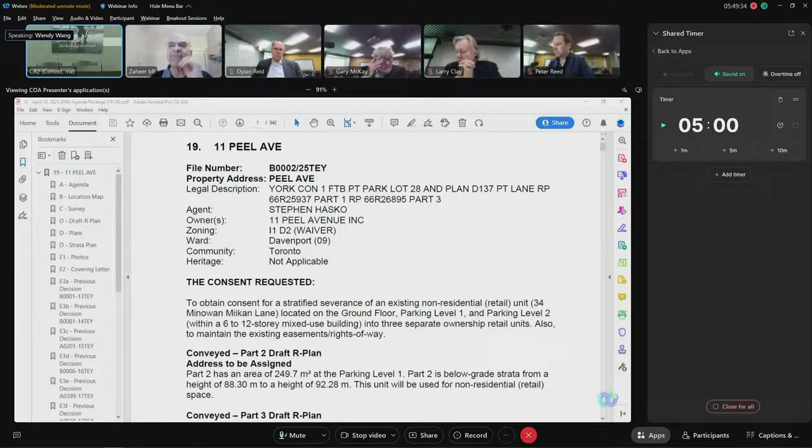Okay, ma'am, this looks like a fairly technical application. This is simply to sever and allow for 3 separate retail units within an existing multi-story building, right? Yes. Okay, panel, have we read this one?

Does anyone have any questions? Do you need a presentation? We'd like maybe just a quick, very brief overview of the application, just because it is technical and stratified. We want to make sure we understand it fully. Okay, go ahead, ma'am.

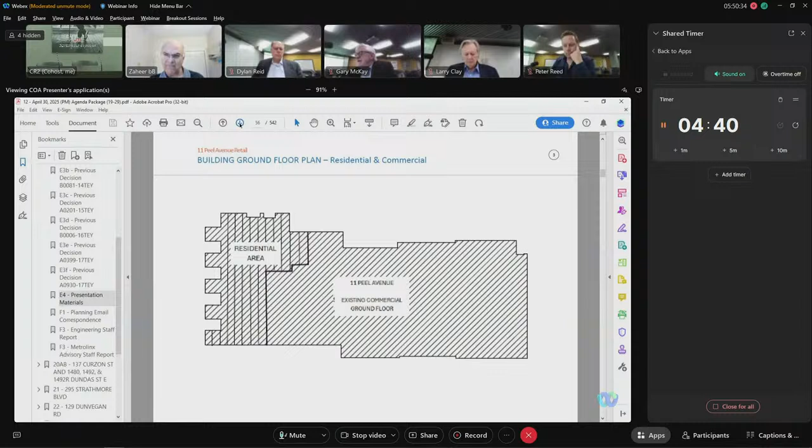Okay, so the retail component is comprising of the ground floor and the P1 level, which the Dufferin Street one is facing the above grade level, and that's the commercial level we are aiming for. On the residential side, there are townhouses, which is not relevant to this application. Can I go to the next slide?

So this is the P1, this is the ground floor. We would like to retain this as one piece, which is called Part 1 ground floor retained, and this is for the entire piece of the commercial unit of 11 Peel. If you can skip to the next one.

And then within the P1 level, as you can see, the top part is connecting to the underground parking lot, and the bottom part is facing Dufferin Street. We have the external exit to the park, and then connecting to Dufferin Street.

We would like to divide this level into 3 components. The P1 on the very left, which is connecting to the ground floor as Part 1, and Part 2, which is in the middle section, is connecting to the next ground P2 level, and we have one extra exit facing Dufferin Street. The last piece, in the color of blue, that's Part 3, will be a standalone severance unit by itself. If you can go down another slide, please.

And the last one is the entire P2 level, and that's considered as Part 3. The font is a little bit small so I'm not able to see, but it's connecting to the middle section of the P1 level that's above this floor. So that's basically what we are aiming for. If you can scroll down.

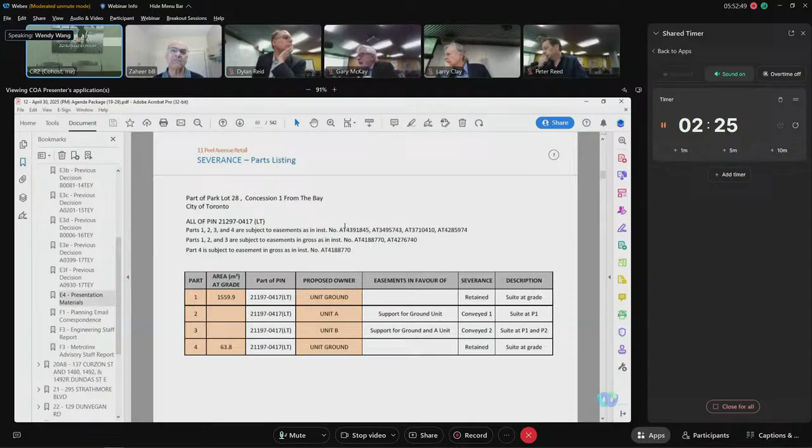So this is a list of the easements that it's currently connecting to, and also the part that we are going to sever. The only thing that we haven't touched is basically Part 4. This is because we have some open space going above the level, so we have something coming up listed as Part 4, and it's easier to be visualized under the R plan. The next one, I think that's basically it.

Any questions thus far? No. Dylan, do you have a question? Oh, Gary, did you? Well, go ahead.

I was just going to ask, why are we creating separate ownerships here with this stratified plan? What's happening? We are just trying to see if we are not able to sell the entire piece of the commercial unit, and if we can sell it in pieces, in 3 components. So we are trying to design it in a way that if we'd like to sell, say, Part 2, then they can take this as one piece, and then we can sell Part 3, and they can take the entire component as another piece. So we try to separate in advance for us to dispose of the property, basically.

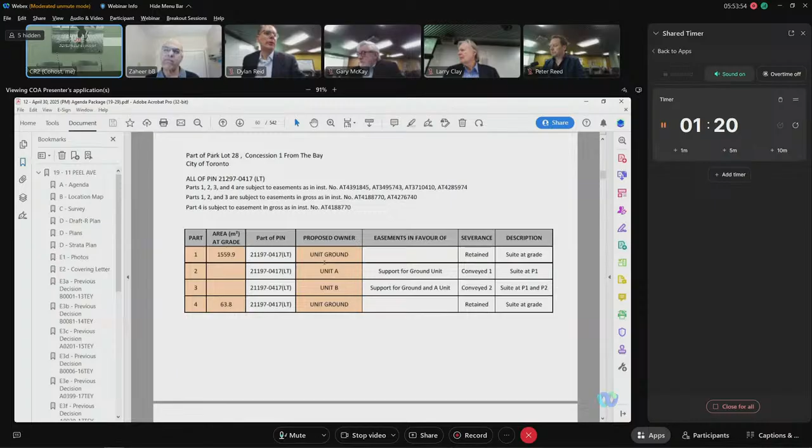Okay, thank you. Dylan? Okay, so I just want to make sure I understand exactly what's happening. So the P1 level actually opens out onto the park, right? Yes. Okay, so even though it's called P1, it actually has like a ground entrance. Exactly. If you can scroll up to the very first page with the photo showing. Yeah, I see, okay, I understand.

So what we're doing is we have Part 1, which is the ground floor and part of P1. Then we have Part 2, which is just on the P1 level. And we have Part 3, which has a little bit on the P1 level and then is mostly on the P2 level. Is that correct? Exactly. Okay, yes, I understand that correctly. Okay, thank you very much. So I just wanted to understand exactly what we were doing. Okay, yes. Anyone else?

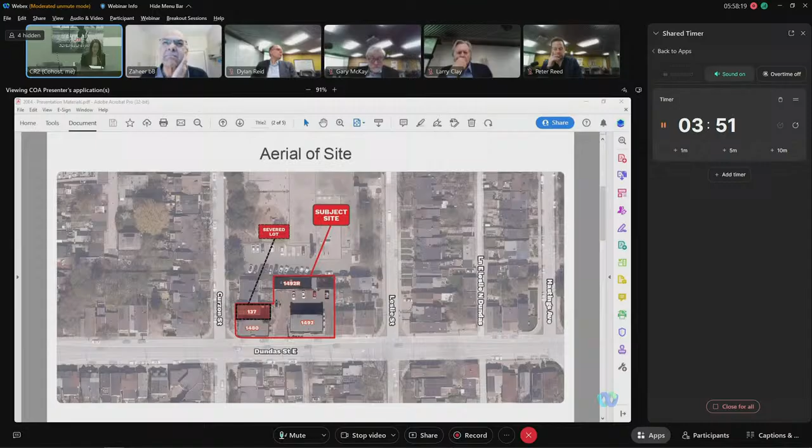This survey demonstrates that the lots were previously separate. The survey is from 1987. The lots merged on title when 137 Curzon Street was purchased, and the technical consent simply seeks to reestablish the previous lot lines. If we go to the next slide, this is our draft reference plan showing that 137 Curzon Street would be the severed lot.

And then if we go to the next slide, the reason for the minor variance application is that the property at 137 Curzon Street, as I mentioned, was previously subject to a minor variance application. At that time, the plan submitted in support of the application showed a lot area of 116.47 square meters, and the variances approved in support of the renovation permitted an increase in the FSI value to 1.57 based on that lot area.

And then the building permit plans included a different architectural set with a lot area of 111.47 square meters, which resulted in an FSI value of 1.64. So the reason we're here is because we have determined that the lot area is actually 111.47 square meters, resulting in the larger FSI value. So we're here seeking the technical severance to obtain this technical variance as well.

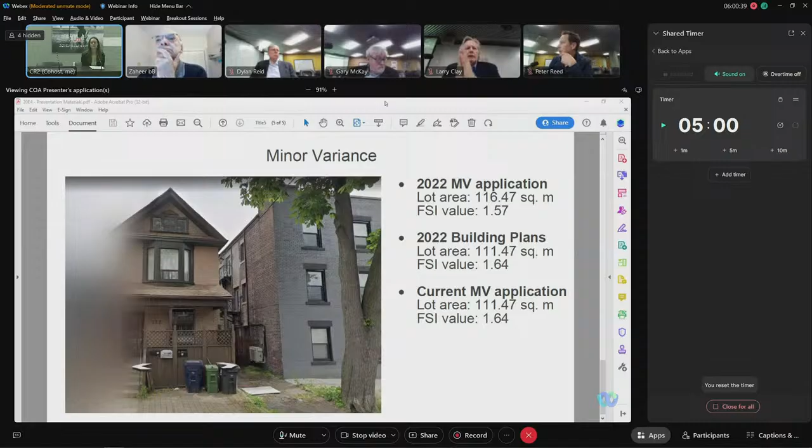Anyone else? Sure, okay, let's go into committee. Seems fairly straightforward. Peter? Thanks, Chair. That was a good presentation to understand what happened, but yes, I believe this is a technical variance just to separate two lots that merged on title. So I move approval subject to development engineering conditions.

Okay, motion by Mr. Reed to approve, subject to engineering, seconded by Mr. McKay. All in favor? Show your hands up. There we go. You have your approval, thank you.

A little slow on the mark there, Zaheer.

All right, we move on to item 21, which is 295 Strathmore Boulevard. This is an application to construct a new two-story ancillary building containing one parking space and one laneway suite with a second-story balcony in the rear yard abutting the laneway. There'll be a total of 2 residential dwelling units on this lot.

Committee has before it a copy of the minutes from the September 24th public hearing, a copy of plan of survey, site plan, floor plans and elevations, revised site plan, floor plans and elevations received March the 21st, and a covering letter from the agent. You have staff reports from Urban Forestry and TTC.

There is correspondence in concern from 1458 Danforth Avenue. Through you, Mr. Chair, we do have the agent online, no registered speakers for this item.

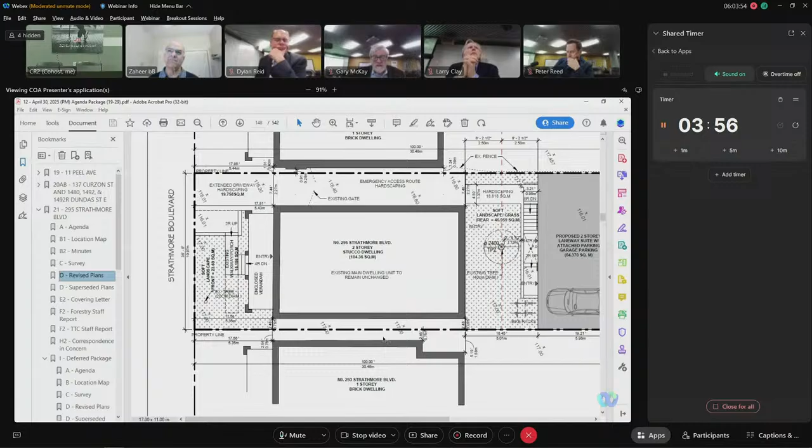Variances proposing right now, there are 3 variances we are discussing. Number 1 is the separation distance, which is also in relation with variance number 3, which is height. The required 7.5 meter versus proposed 5 meter.

Another one, the second one, is the building width, which is permitted 8 meters versus proposed 10.97 meters, which is the full width of the property, to accommodate design adjustments after reducing height.

And number 3 is the building height, which is permitted 4 meters versus proposed 4.3 meters, which is consistent with approved variances across the city and necessary to maintain livable interior space. This variance was also communicated with the planning staff back and forth, after the original requested 4.97, and after a request from staff to reduce it down to 4.3 meters.

So basically the proposed suite is modest in scale, respectful of the laneway and neighboring properties. The additional 0.3 meter in height is critical to allow for standard ceiling heights and livable spaces, but remains well within what has been previously approved in similar contexts.

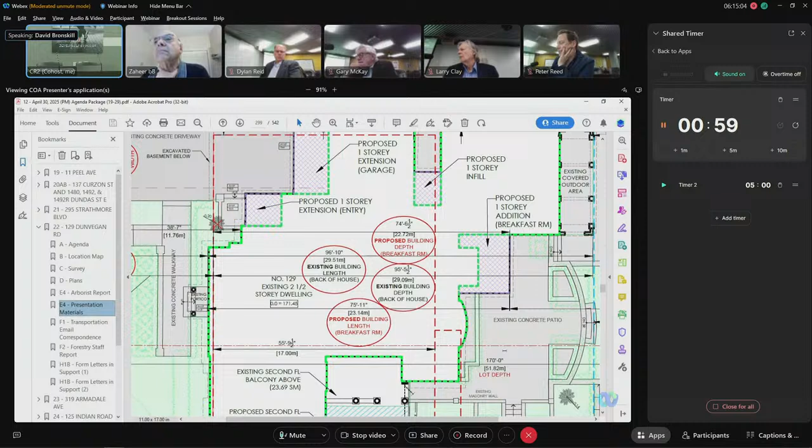You can then see on this map just the areas in purple where some additions are being added to the development. The one-story breakfast room is therefore counting to the length and depth that is being measured here. But as you perceive the house, Mr. Chair, I'd suggest all of these additions really are tucked in, frankly, in quite a subtle way behind existing portions of the building.

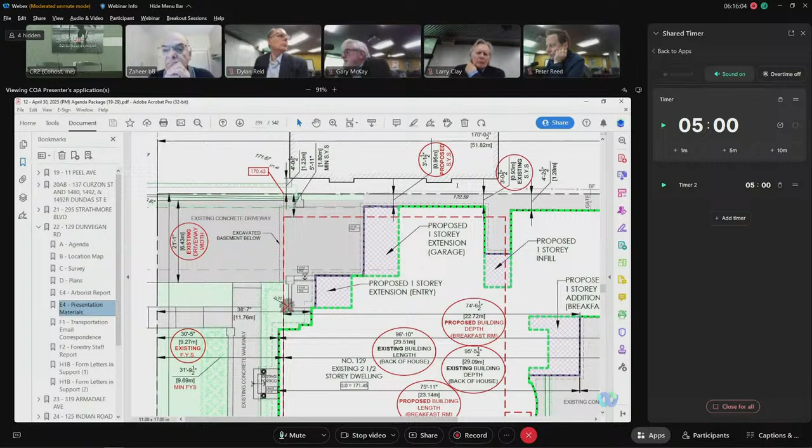Just while we're there with staff, you can see the existing driveway at the north, 6.43. The variance is recognizing that. There are no landscaping variances associated. And the north side yard setback, there's that little hatch, purple addition, to the left - it's a proposed one-story extension garage. You can then see the 0.95 side yard setback. That's the variance picked up. 0.93 is actually existing, but for what's being added, they're picking up the 0.95.

And then, Mr. Chair, I know I ran out of time, I'll just quickly do two things. Page 5 of the presentation just has the numbers. Obviously this area has lots of large houses with very significant FSIs, and we've circled in red anything that's above what we're seeking, and there's lots of them.

I'll just quickly touch on the balcony before commending the renderings at the back of the package to you. The balcony - if staff don't mind flipping to page 10 of the PDF - that's the one, that's great. You can see there's an existing balcony area there. There's a skylight being added in, and to get access around the skylight for maintenance, although it's not really usable space, the balcony is technically increased to 53.68 square meters. So all of that space counts.

It is larger than the bylaw, obviously. It is a significant space, but it's essentially a second level courtyard screened by the building itself, and because of the size of the lot and its depth, very far removed from the properties to the east on Forest Hill Road. So overall, I think just the function of the design, using the existing building, the size of the lot, and the subtle nature of the revisions, I'd commend to you the elevations and renderings. But otherwise, Mr. Chair, I think the variances all meet the four tests.

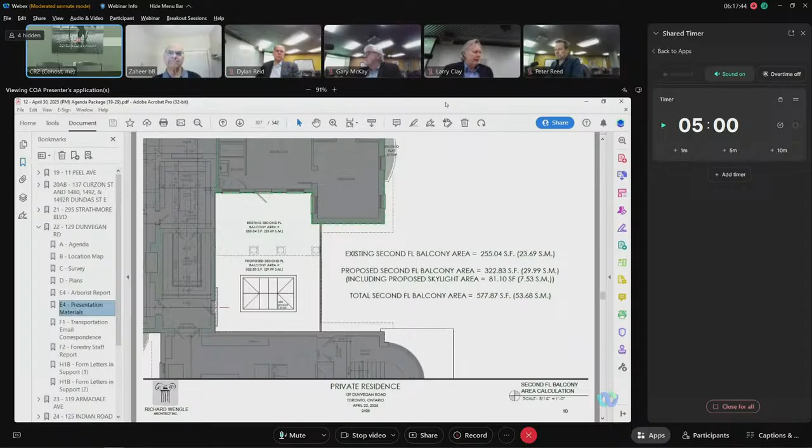I think you've answered everyone's question, so let's take this into committee. Anyone want to take this one on? Pretty large lot. I'm happy to.

Sure, Peter. There is a lot happening here, but it's a lot of very small stuff, I think, and most of the new massing is really masked or contained within the structure of the home. Some of the variances come out odd in terms of how they're measured, but really I don't see it as being a significant departure from what's existing there, particularly from the street. Thanks for the explanation about the balcony, that makes sense. So I think the variances are minor and their impact is minor.

So I would move approval subject to urban forestry 1 and 2. Motion by Mr. Reed to approve, subject to forestry, a seconder, Mr. McKay. All in favor? You have your approval, sir.

I would note that Dunvegan applications tend to get a lot of opposition from neighbors. In this case, neighbors were completely on side, which I think is a good thing, and not all that common on the street. Thank you, Mr. Chair. Thank you.

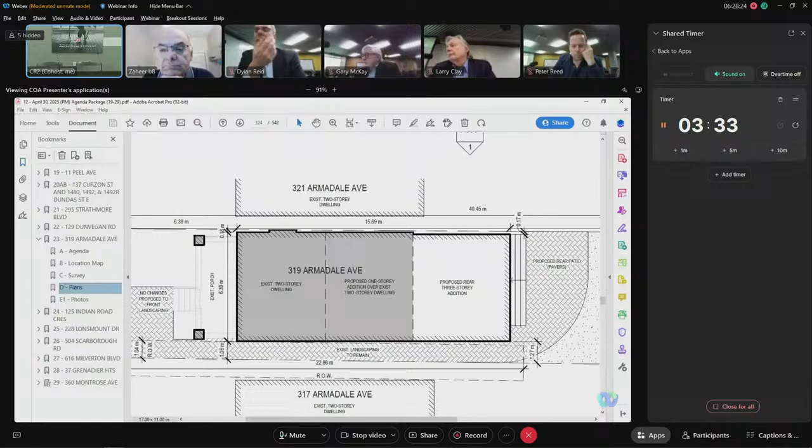It looks like it's offset in the back though, right? So they've come in a little from the lot line? Not enough to, yeah again, unusual. Anyway, I was just surprised by that because normally in these circumstances we would get that as one of the variances. I guess the other question is that the tree, probably it's not big enough to be bylaw protected, but I'm sure that it's a tree the neighbor uses and appreciates. Can you speak a little bit about any ways that you're going to make sure it's not damaged?

No, the tree will be removed as part of the addition. Okay, is it on your side or the other side? It's on the owner's property. You can see it just on the left of that photo there, that small cedar tree. Okay right, so that's on the owner's property. It's on the owner's property, yes. Okay, got it. Thank you very much.

Okay, any other questions? None? Okay, let's take this into committee.

Zaheer: Chair, with this one, thank you. We've basically got two variances, and I don't think either of them are excessive. The proposal is a very common type of proposal that we see very often in Toronto. There are no issues with this one. I don't believe there are any conditions attached either. So I'd like to move a motion to approve with no conditions.

Okay, motion by Mr. Byatt to approve, seconded by Mr. Reed. All in favor? Okay, you have your approval, sir. Thank you. Thank you, Mr. Chair. All right, we move on to item number 24.

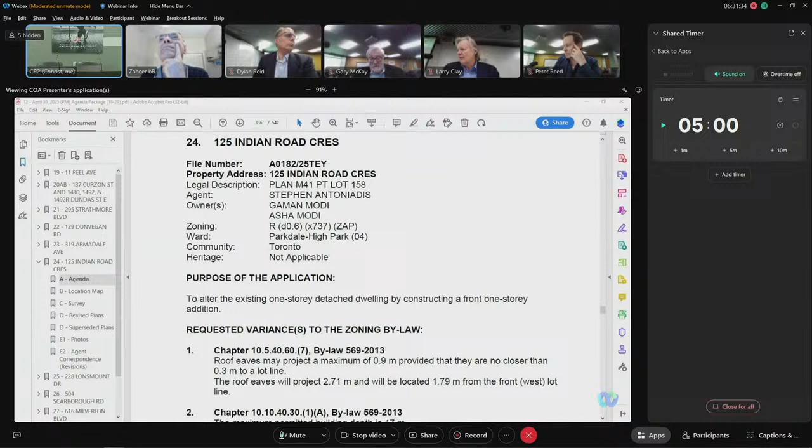What's the condition of the rear yard now? It's a driveway. Oh, because it's a corner lot. Okay.

All right, any other questions? Yes, Peter? I have some concerns with the front yard setback. With that addition in the front, it's going to change the streetscape, in terms of how it looks and feels. Can you speak to why that would be appropriate?

Looking now at Google Maps, the building length and building depth will increase, but it will give additional space that is important for my client. In terms of privacy, there is a tree. I don't see much changing except just a 2 meter increase in depth, and it will be built on an existing patio.

Are there other instances in this general area where there are front additions that go against the established trend? I'm not sure about that, but I was checking to see if there were any comments or concerns, so I'd get an opportunity to discuss them, but I did not receive any.

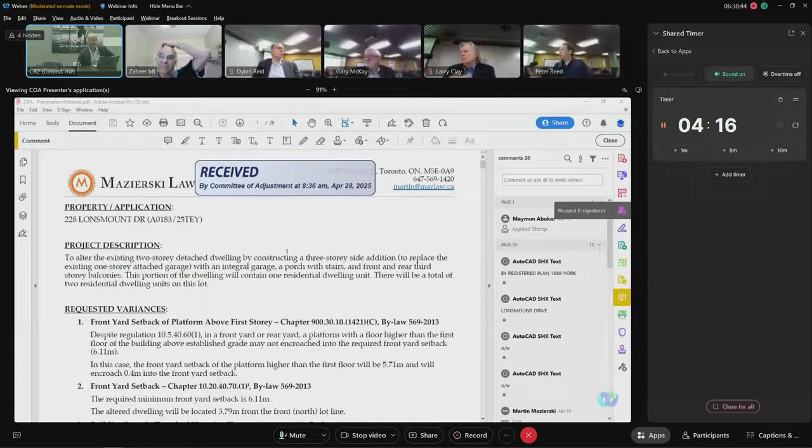I have Exhibit 1A, on page 7 of 28 of that presentation. I have a markup of the minor variances from the prior refused Committee of Adjustment decision. I know the neighbors have raised some of this in the prior variances, so that record is there. There's a record of all the variances that have been eliminated - that's 4 of them - and a detailed record of 3 variances that have been improved. So of all the 7 variances that were refused, 3 have been improved, 4 have been eliminated in the current proposal.

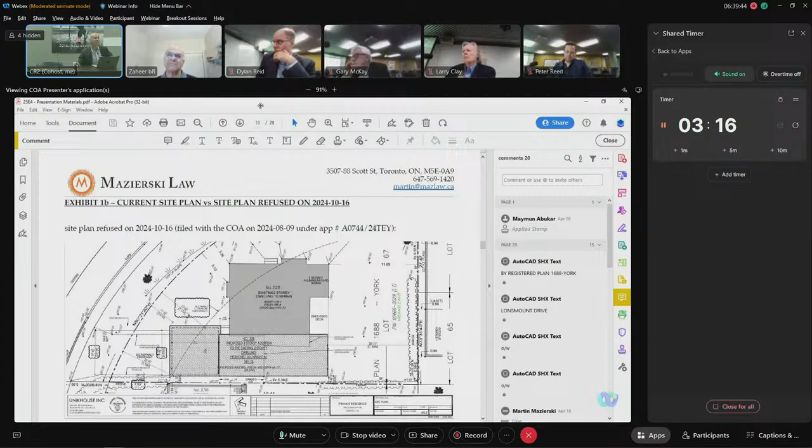If staff could please go to Exhibit 1B, that's on page 10 of 28. I have a site plan there - I've done comparison site plans. That's a comparison of the plans from the previously refused committee at the top, and the site plan from the currently proposed proposal that's in front of the committee today.

The bottom proposal explains how the addition has been shortened. There's a step back at the rear of the second story. There's an improvement to the front yard setback variance, which has improved from 3.51 to 3.79. The front yard setback of the third story porch has improved from 3.51 to 5.71. The length of the proposal has been reduced from 20.62 down to 19.88. Again, that markup shows the shortening of the addition, the step back at the rear of the second story and third story, and a step back at the front.

Now, if we could just go to - I wanted to proceed now, Chair, to the specific variances. I have one more exhibit, Exhibit 1C, on page 11 of 28. This is a copy of a drawing of the previously refused side elevation from the west side versus the currently proposed side elevation. That exhibit will explain to the tribunal that previously the proposal had a 20.37 meter length across that distance. Currently, that length has been reduced to 17.77 meters at the second story.

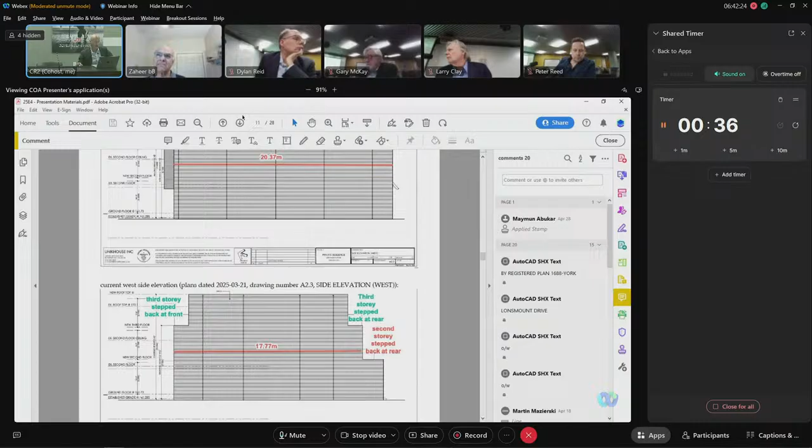the length looks like from the lot to the west, which is the nearest really adjacent property, Chair. So to the next slide, I wanted to go to the front yard setback specifically. If we could still please go to page 12 of 28 of that presentation, and zoom in a little bit on that one.

That little pink shaded area represents the front yard setback variance associated with the third story porch. That's the only part of the variance. I'm going to come back to this slide for the blue area, but that pink area is the only part that's actually non-compliant of the bylaw. It's a little pinch point.

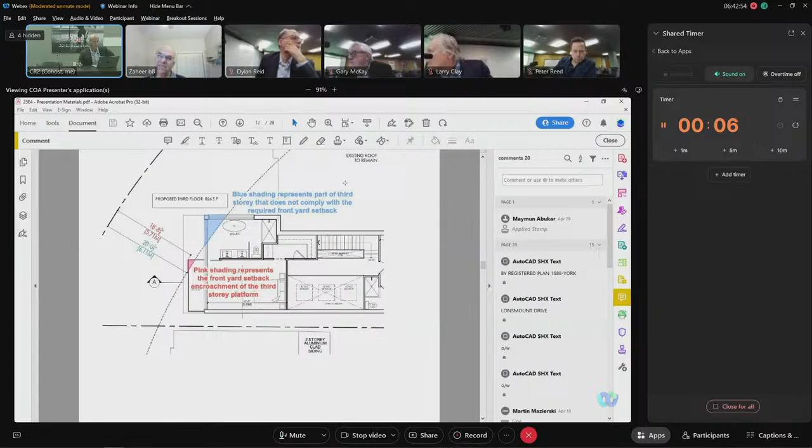So if we could jump to the next exhibit, the very next page. I'll just ask you, you're well past your time. I've given you a little bit more, but if you could summarize for us. I'll be very quick then.

It shows that for anybody walking down that street. If I could jump, because we're summarizing, to the exhibits on page 17 and 18. I think page 17 is best.

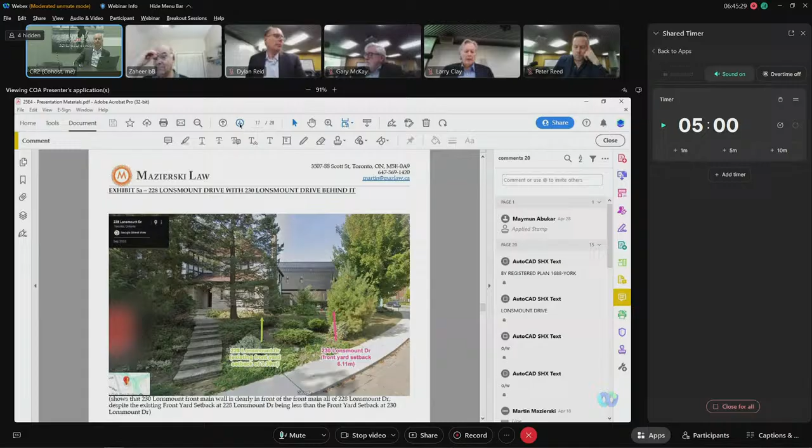Just page 12. Yes. So you have the pink and the blue, but that's on the third level, but there's a level below that that's also sticking out, right? Yes, I have an exhibit that explains those setbacks at that story completely.

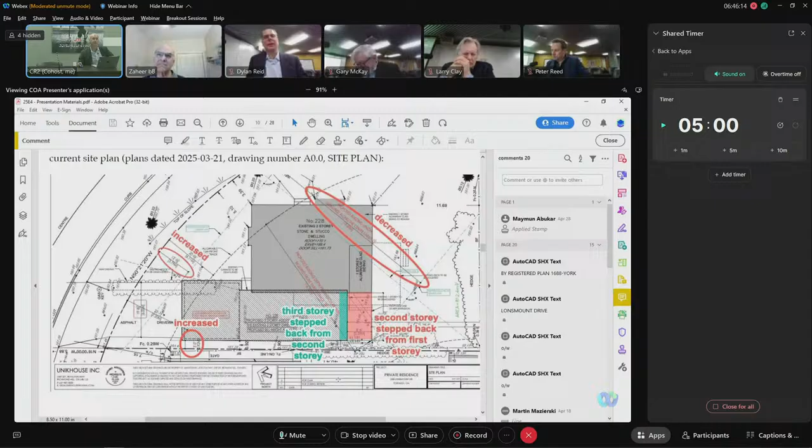But those are further into the front yard setback. Yes, I just wanted to clarify that. On page 10, I think page 10 is a good one. On the bottom is the marked up site plan of the current proposal versus the existing. It shows the existing 3.79 meter setback at the front, and it shows the 3.39 meter setback of the existing building on top of that. Okay, thank you, I just wanted to clarify that.

And my, so the addition height is 10 meters, right? Yeah, but there's no variance, Chair. No, that's what I was just going to say, there's no variance, so you're complying with the bylaw. Was the previous application similarly? There were height variances, there's little tweaks. Right now there's rules in the bylaw about how much of the wall has to comply, and it has been reworked and discussed with the examiner. So the wall heights now comply, Chair.

Okay. All right, maybe we can go to our speakers.

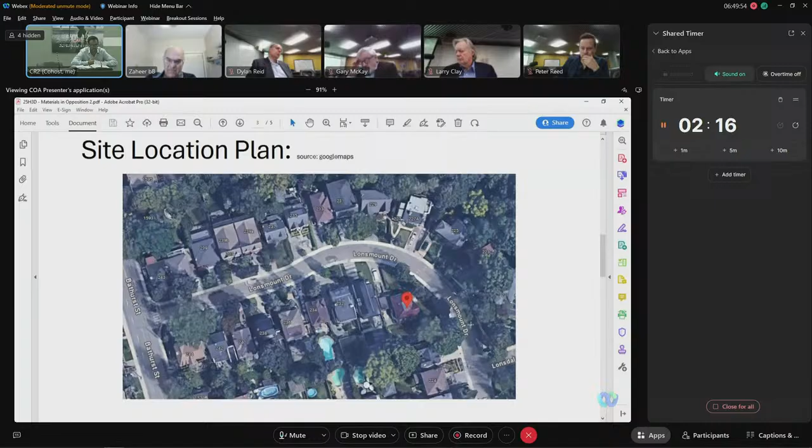So the next slide shows just an overlay. You can see how all the houses, whether the street is going straight or bending a bit or otherwise, the front yard setback is really a character-defining element of this part of the city. It's not just one house or what's beside the next house - the whole street has observed, and I think is thriving off, the street character of the front yard setback, whether it's at a curved part or a straight part.

So none of us made this curve, but this is what's here, and we just observe that that's an important situation.

If the next slide here, we zoom in - if I could just trouble you to zoom in just a little bit on the scale, thank you. You can see approximately, this is the site plan as it currently is, and you can see that part of the house does encroach. It's a nice brick piece that does encroach, so to speak. It's relatively low, etc. And you can see where the red kind of curves, so it's curving in parallel.

The blue portion is still the buildable area of this site. This is a site that has a front yard and 2 side yards that converge, so that hashed area represents an area that is buildable. So the rationale that was presented, that it's a difficult site - difficult maybe in the eye of the beholder - there is a lot of buildable area.

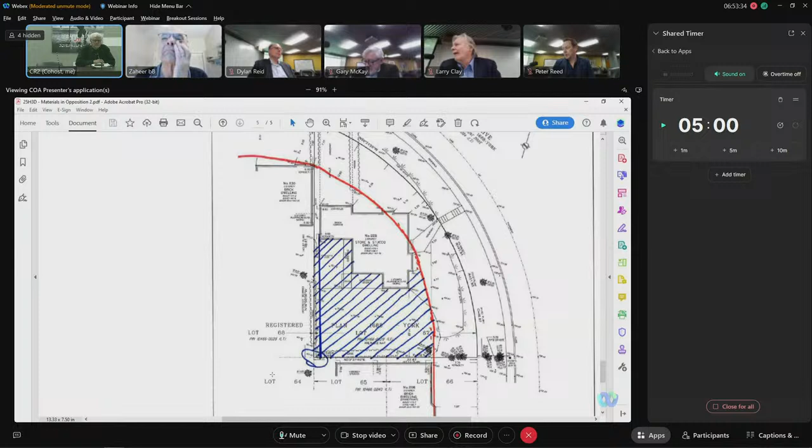Okay sir, you have 5 minutes. Okay, I prepared a presentation for the young man to bring up. In essence, it's like Takashi's. Takashi and I and the rest of the neighbors think this is just more of the same.

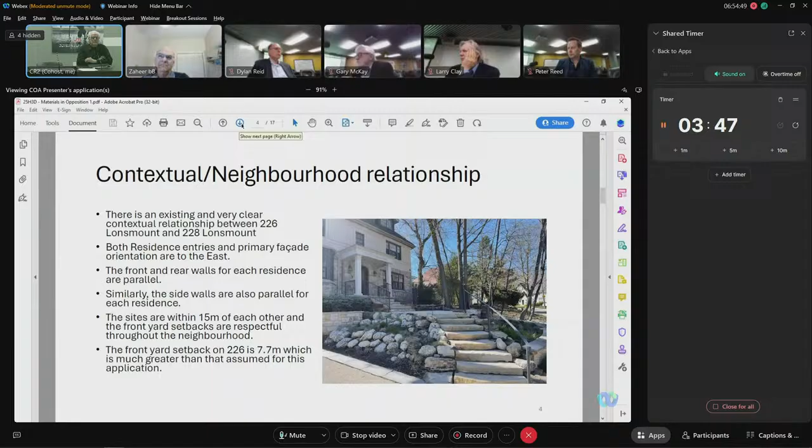This is the contextual view of 226 versus -- you can see 228 in the background. 226 and 228 both face east, they front on Lonsmount Drive. And I disagree with the examiner's idea that the setback to 226 wasn't relevant. It would seem that it does, that it is relevant, even though it's more substantial, 7.7 meters.

So next slide, you can read all the other stuff. So this was basically -- I put this together just saying it's not in the spirit and intent of the zoning and development bylaw, in our opinion. It's not minor. And then the next.

This is the front view. So they did set it back a little bit at the third floor, but this red bulk is the encroachment. You can see it on drawing A0.0, that the line, the arbitrary line of the setback, is 6.1, and the encroachment reduces the setback to 3.79, as the counsel mentioned. That means it projects 2.32 meters into the required front yard setback. By the way, that's nearly 8 feet.

If you go back to the last slide -- I'm sorry, really quick -- you'll read that I've noted it's a 37.9% reduction, as in the encroachment.

So let's keep going and you guys can read all this a little later. That's the yellow line, or the orangey line -- that's the encroachment of the old house from whenever it was built, in the 40s or 50s. So that encroached a little bit, but it's not as significant.

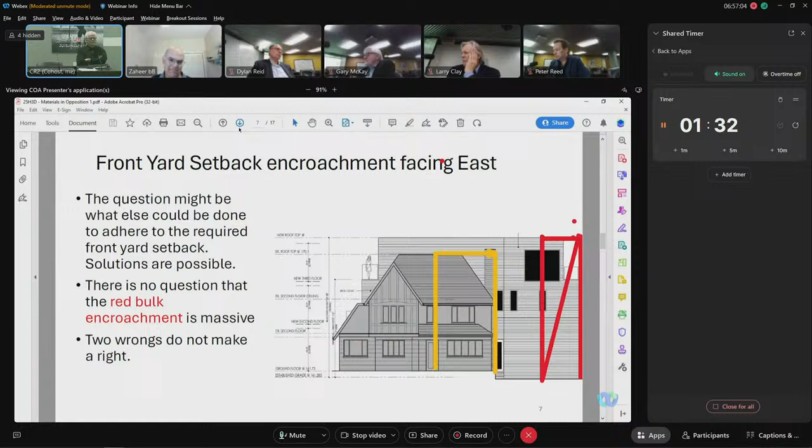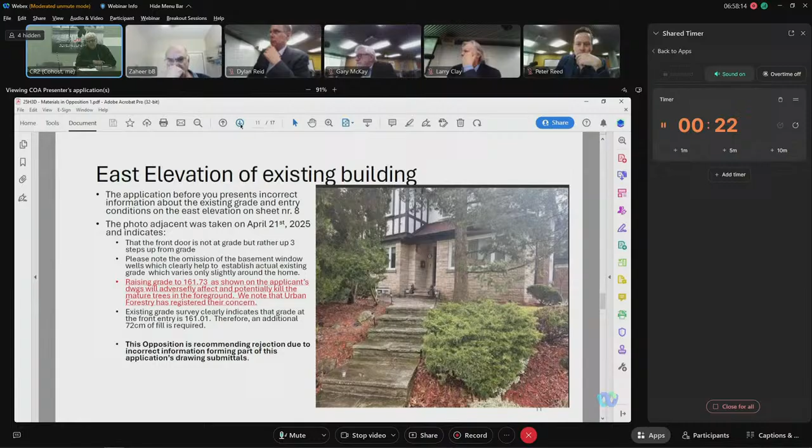This is the elevation of the existing building, and what I want to point out here: grade is an amazing term. You can see the grade is not at the front door. It grows - there's 3 steps up plus the threshold.

Same thing here. The omission of the window wells has created an artificial-looking surface, and you'll see it in the establishment of grade. Now, I'm not challenging the established grade calculation. I'm concerned that you're looking at a drawing that has erroneous information on it.

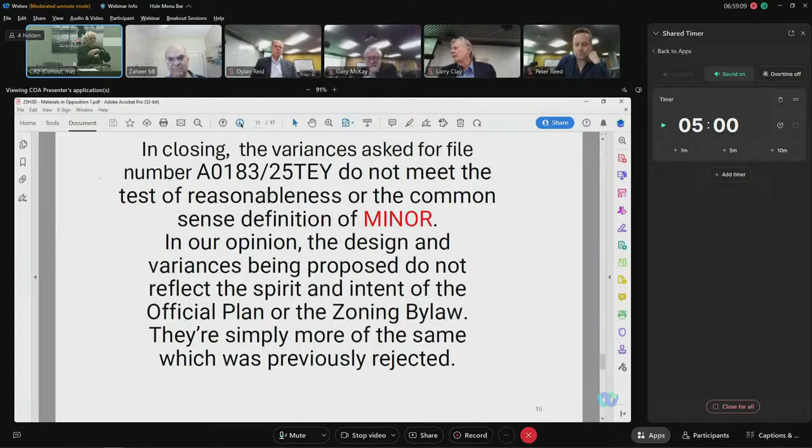Last slide, I think. So that was - it's not minor. And then there's what I like, this quote: 'Right's right if no one's doing it, wrong is wrong if everyone's doing it.' It applies to all of us.

All right, sir, thank you. Thank you for that flourish. Any questions of this speaker? Okay, thank you very much. We get the agent back.

Okay, sir, you have 5 minutes to respond. Thank you, Chair, I will try to be brief and just focus on some of the points raised by the neighbors. Chair, with respect to the first presenter, I believe the presenter was an architect and developer, mentioned that he put forward a proposal without minor variances because he had worked with planning. I wanted to remind the tribunal, if it wasn't noted on the record, that this proposal has not raised any concerns from the city planning department.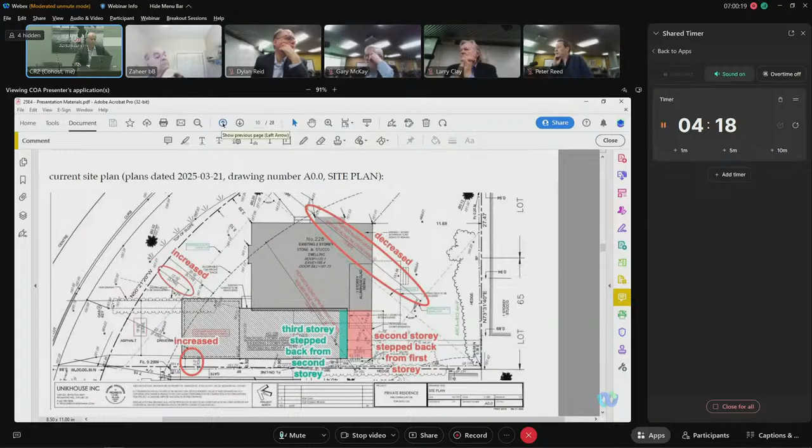With respect to some of the other comments, again, on the whole idea of the front yard setback, I think staff, if you could please go to Exhibit 3A, that's the one on page 13. I think that's a very critical exhibit. The one on the page that follows simply explains where that pink line is coming from. The pink line is the front wall of the building adjacent at 230 Lonsmount.

I'm going to address some of the concerns from both sides mentioned here - they're concerned about the transition from the property to the south. When the examiner determined the required front yard setback for this property, they simply looked at that building along the red line. That building has a front yard setback based on the regular lot of 6.11 meters. That's the required front yard setback because the examiner looked at this building and saw that the other building was so far away, and given the location of this addition, when determining the required front yard setback, they did not average the properties at 226 and 230.

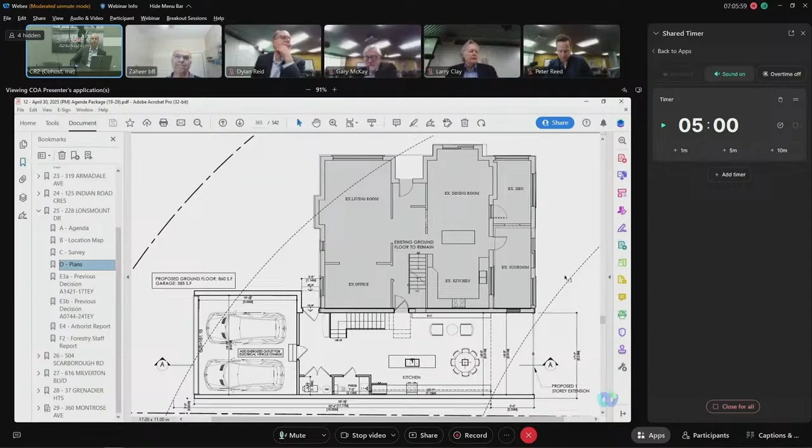Okay, thank you. Any other questions? Okay, seeing none, let's take it into committee. Three of you were on this application when it was before us last time, so I'm going to ask you guys now what you think. Who wants to go first? Peter? Sure, I can start.

I think it's a lot better now than it was last time. Last time, as Dylan said, there were questions. It was just hard to figure out what was happening, what the intent of the proposal was. I think there have been significant improvements around the massing, stepping at the front and back.

But from my perspective, the main issue that was there for me last time still remains: the front yard setback. I understand that given the complexities of this curve and the corner lot, calculating that number is not clear, but I find that it sticks out too far. Even though you've got this very large structure to the right of this property, I think that it comes out too much, and I think that has a negative impact on the streetscape.

We said last time this was heard that there's a lot of flexibility on this lot, like there's a lot of room where additions can go without having to push into that front yard setback. It's not for me to determine why this is being put forward, but I think there are other options to more sensitively develop on this site that wouldn't detract from that front setback. I do think it's great adding an additional unit in neighborhoods like this. It doesn't happen that often, so I find that a very positive thing. But in its current form, because of the front yard setback, I can't support it.

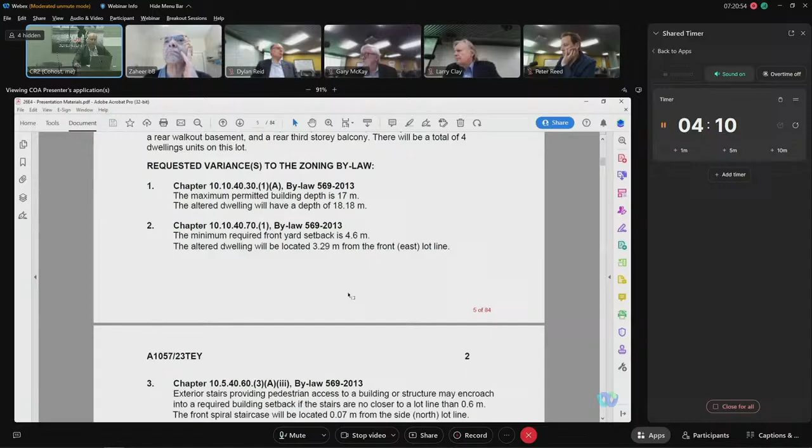So after that Committee of Adjustment approval, Chair, a building permit was issued. The building permit is in Exhibit 2 of the presentation, starting on page 13 of 84. If any panel members wanted to look at it, all the drawings are there.

During the construction process, it was discovered that the pre-existing northern wall had been compromised, and that the pre-existing northern wall at the basement and first story level would have to be supported during and after construction. A signed and stamped engineering report explaining the structural issues in more detail is attached as Exhibit 3, starting on page 27, if anybody wanted to look at that in more detail.

I wanted to quickly go to page 36 of 84 of the presentation. If we could zoom in on that northern wall, this is at the basement level. So what happened is, staff, could we zoom in a little bit, please? Yeah, if anybody can see that existing wall at the basement level, zoom out a little bit. I just wanted to look at the north side where that red line is drawn.

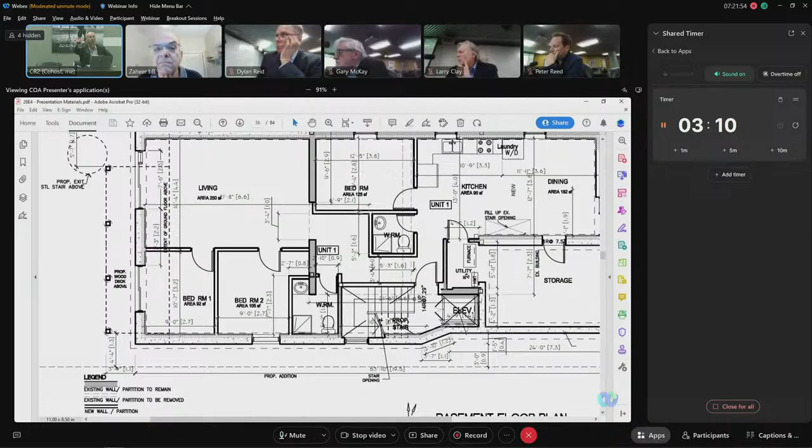Yes, perfect. So that existing wall at the basement and actually at the first story level will remain in place as is. That is actually the basis of the legal non-conforming side setback on that north side. What happened during construction, as explained in the engineering report, there were structural issues with that wall, again at the basement and first story level. Therefore, a concrete structure was built around it on the perimeter, on the outside, to solidify the structure and avoid a dangerous engineering situation. If you see that wall, that building wasn't pushed.

That red line represents the difference between the building permit and the current proposal, and it also represents the entirety of the minor variance. That 20 centimeters is the support structure to maintain the basement and first story wall. If we go to the page, you'll see that structure extended all the way to the back, that thick wall to maintain that compromised wall at the front. There's a 20-foot concrete footing all in all, trying to maintain the structure and keep it up all the way to the roof.

If you go to the second page, you'll see the page that follows, please. This is page 38 of 84. One page down, same thing. This basically shows on the first story, the same thing has happened, that concrete structure was extended upwards, and that red line, that red area, represents the only difference between the building permit and the proposal. There's a massing on that floor, and it represents the only part of the minor variance.

Again, that supporting structure, for structural reasons, the 20-foot concrete footings have created the 20 centimeters in extra width, and maintain steel beams that now go up all the way to the roof to maintain the basement walls and the first-story walls all the way to the roof. So the entire variance for the whole proposal is tied to these 20-foot footings and steel beams extended upwards to put the building up against the wall.

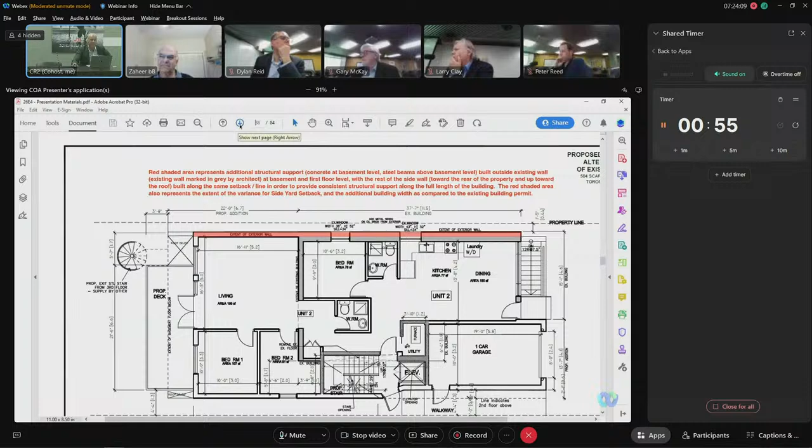I have photos, a lot of photos starting in Exhibit 5, on page 47 of 84, showing many very similar side yard setbacks. These photos illustrate that many of these properties have non-compliant setbacks. Some of these setbacks may have been approved by variances. Many will be legal non-conforming setbacks of the original buildings that predated the standard in the bylaw, and the legal non-conforming setbacks involving additions to original buildings that predated the standard in the bylaw.

So again, there might be additions to the original non-conforming structure. The photos show an aggregate side yard setback less than 3 feet between these buildings, which is less than 0.9 meters. Even though, as per the photos, the side walls have windows, which would, absent a legal non-conforming wall or minor variance, require side yard setbacks of 0.9 meters - meaning that those setbacks between walls with windows, in theory, would need to be 1.8 meters if they had windows.

If they didn't have windows, there should be 0.45. And there are many examples there that look like they're less than 0.45 because the aggregate setback is less than 0.9, despite the windows.

Again, there's a comprehensive photo set there, Chair, explaining the character of the neighborhood. Just to summarize, the intent and purpose of the official plan is to manage the character of the neighborhood. The zoning bylaw implements that intent and official plan. The setbacks are consistent with the neighborhood.

I'm going to address the impact later in my response to the neighbors. Last comment, Chair, is this is four units. So when we're talking about special considerations, there will be 16 bedrooms in this fourplex. In this revised proposal as it stands in front of the committee today, there'll be a total of 16 bedrooms supported in this fourplex when it's completed. All right, thank you, sir.

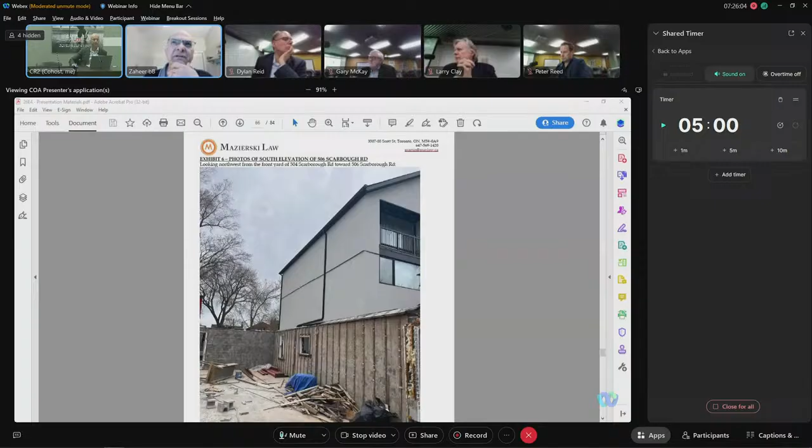Yes, here. Just a quick one. Thank you for the explanation about the side yard issue and the concrete wall. I was just looking at your drawings and the west elevation. You've got a rooftop deck? I don't believe there's a rooftop deck on the plans.

One second. Am I looking at the wrong application? Oh, you know what, I think I'm looking at Parkside Drive. Oh, no. No, you're right, you've got a spiral staircase going up.

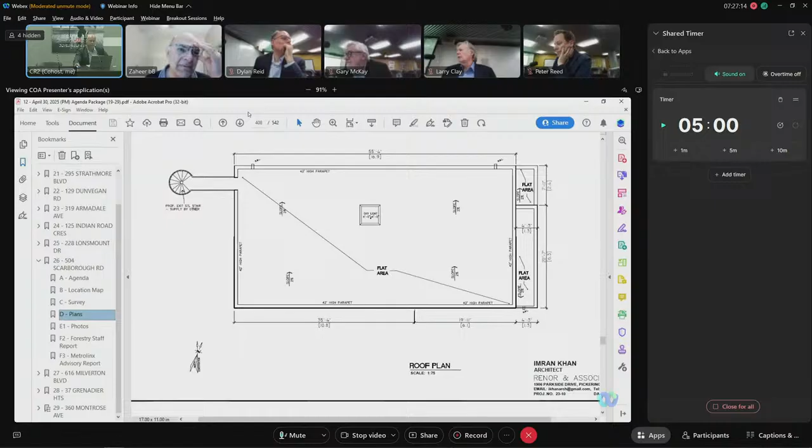Chair, if I may comment, if you look at the west elevation, it's quite clear that there is a spiral staircase going up to the roof. Sure, I do recall that that's on updated plans. I acknowledge I had this discussion earlier with my client, and my understanding was they weren't going to introduce one. I think this was one of the recent revisions where I didn't catch it in earlier plans.

I just wanted to go on the record because I've had this discussion with my client. If the panel felt like this rooftop deck was at all a problem, I'm happy that the panel adjust the decision and eliminate that rooftop deck. That was, again, discussed with my client. There was discussions going back with the architect. I'd advised them not to add a rooftop deck.

I think something might have been lost in translation when the plans were most recently updated to show an additional detail that came with my cover letter, and I missed that update to those plans there. I'd spoken with my client, I discouraged them, I didn't think it should be part of this proposal. If it's an issue to the committee—

Well, it's an issue in the sense that it wasn't part of the application that received approval previously. And rooftop decks have a way of getting neighbors' attention. It is something that often neighbors are concerned about: noise, visual overlook, and everything. So it wasn't part of the first application that was approved. You and your client might be well advised to remove that now.

Chair, like I said, I'm happy to remove that. It was my advice to my client. I didn't realize, again, I think it might have been lost in translation in discussion with the architect. I'm happy to remove that. I'm not requesting a rooftop deck today. All right, good catch, Zaheer.

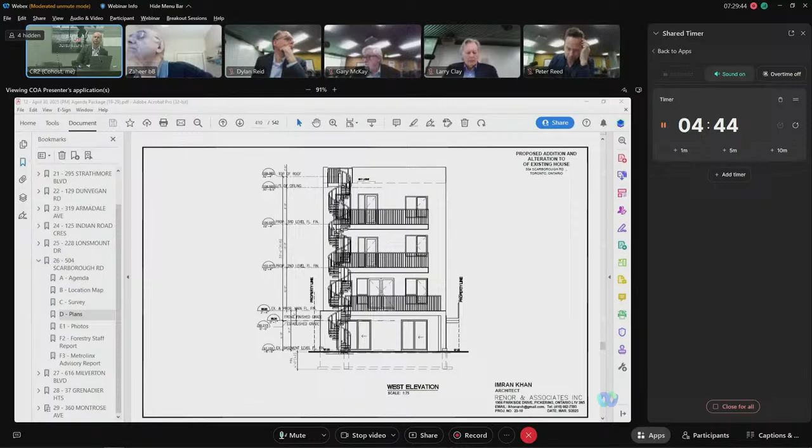Okay, perfect. I have submitted a letter expressing my strong opposition to this application. Can I have the presenter pull up my letter? There are 4 reasons and a few pictures that I want to walk you through what we are dealing with. But to start, I just want to say that I'm actually pro-housing. I have myself developed a 4-plex on my side, so I know what this owner is trying to do.

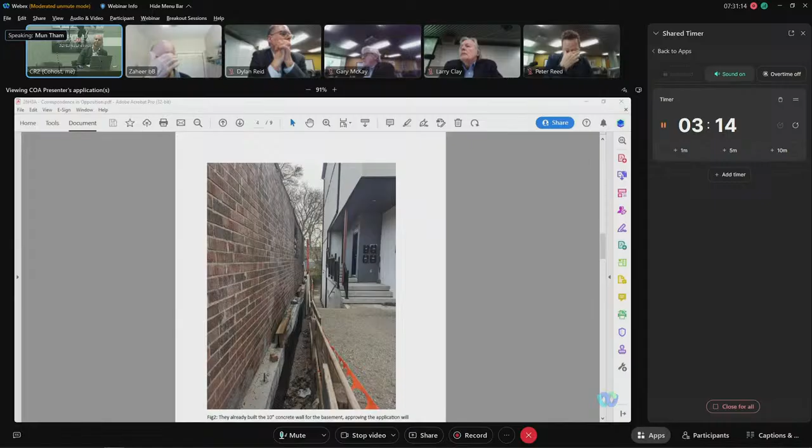If you can scroll down to the next picture, as you can see from the back, it's a very narrow alleyway. Our two houses are going to be four stories, a giant monster four-plex with a narrow alleyway about 25 feet long. During wintertime there'll be no sunlight. It's going to be bad for snow removal. That's why this setback is not acceptable, it's going to make the space really crowded.

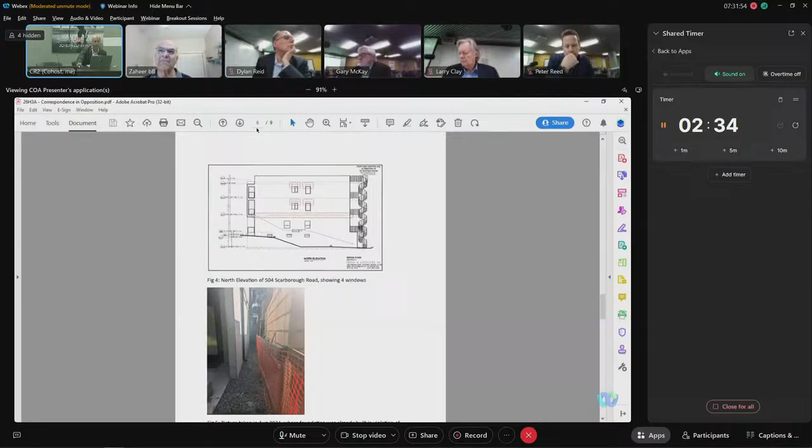Next reason, if you can scroll down, this applicant also showed a successive kind of manipulation of the zoning process. If you look at our bylaws, the required setback for a four-plex, clause 3A, should be 0.9 meters for any walls with windows. But right now they are asking for a 0.44 meter setback with windows. How they're able to do this is because rather than pursuing a new build, they have gone the route to alter the existing single-story dwelling. They were able to retain the legal non-conforming setback of 0.64. And now, in August, they built this foundation wall that's only 0.44 meters. So successively they are able to reduce the setback. I feel that this is a pre-planned encroachment on their end, and it compromises the integrity of our planning process.

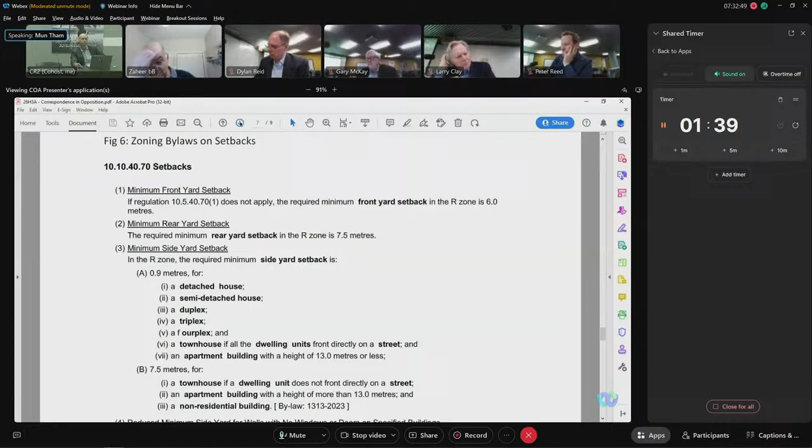If you can scroll down to the last picture. The last reason is this applicant has also shown ongoing disregard for bylaws and neighbor safety. You can see from figure 7 and figure 8, during construction, because they had to excavate really deep, 15 to 20 feet, they have severely damaged my property. This is the back walkway. At one point it was all gone, exposing my foundation for over two months last summer. I escalated to Toronto Building. They issued two notices of compliance, but the applicant ignored that as well. They have also built their construction fence on my property for all of summer. They did not get my approval and refused to remove it. The careless conduct extended to other neighbors, who is the other speaker, and also to city infrastructure.

If you look at the walkway in front of their house, it's completely damaged. To conclude everything, I have to do the repairs to fix my driveway, my stairs, and my walkway. They still haven't reimbursed me. So I don't understand why we even want to contemplate this application. Having built a fourplex myself, I understand the economics, I understand what they're doing. They didn't have to be this greedy, they didn't have to go this far to cut corners. I respectfully ask the committee to reject the application.

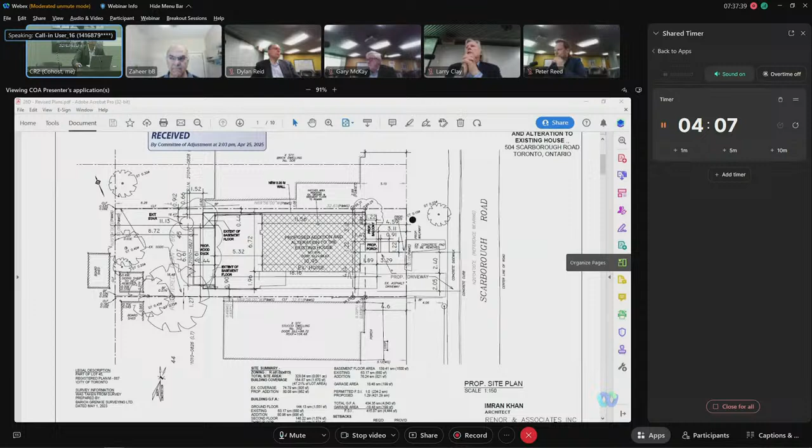All right, sir, you've heard some concerns, particularly around construction and other matters. I wonder if you could take no more than 5 minutes to respond. Thank you, Chair, I'll be very quick.

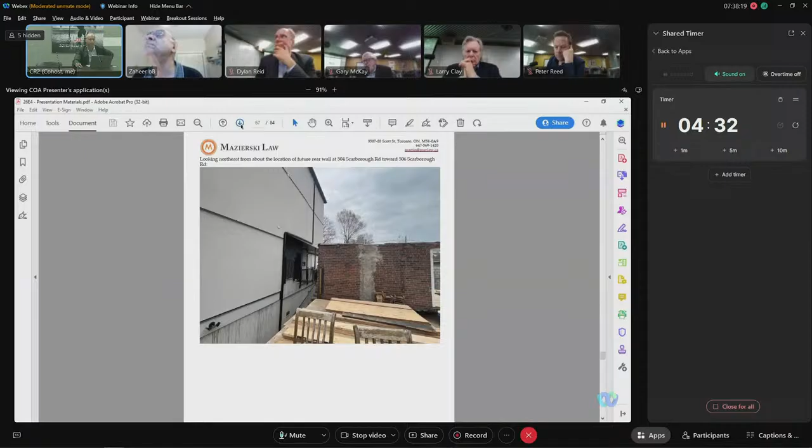To address the concerns raised by the first neighbor about 506, there was a privacy concern. I was hoping, if my presentation's up there, you could please go to the photos in Exhibit 6, pages 66 to 70, attached to my presentation. It's photos of the south elevation at 506 Scarborough Road. What those photos demonstrate, Chair and panel, is that there are no windows on that property at 506 Scarborough Road.

With the exception of one window—if you freeze at that photo, you can see through the window on the right. That's the window behind the kitchen, the existing location of the kitchen window at 504 Scarborough Road, and it has a window at 506 Scarborough Road on the other side. That's the only window at 506 Scarborough Road facing in this direction. That's the one complained about by the neighbor regarding privacy issues.

To reiterate, the addition on this building is not shifting that wall anywhere closer than what's in the building permit on the legal non-conforming wall. It is simply making the wall thicker. Therefore, the kitchen on the inside of that wall will not be any closer to that neighbor than it is right now, because we're thickening the wall on the outside but not bringing the living space any closer, for privacy reasons. Another quick point about that window—

If we look at the survey, on page 72 of 84 of the presentation, I've marked up the existing side setback on that lot line. Depending on which part of the survey one looks at, that existing side yard setback at that lot to that wall where the window is, is either 2.83 meters or 2.88 meters—it's on the survey in the Committee of Adjustment record. So if you take the lower of those two numbers, 2.83 meters, plus 0.44 meters, the total separation between those two walls with the windows in them would be 3.27 meters. The bylaw dictates that if walls have windows in them, they're supposed to be set back by 0.9 meters, so two windows that comply with that bylaw would be at least 1.8 meters apart. In this case, we will be at least 3.27 meters from that wall.

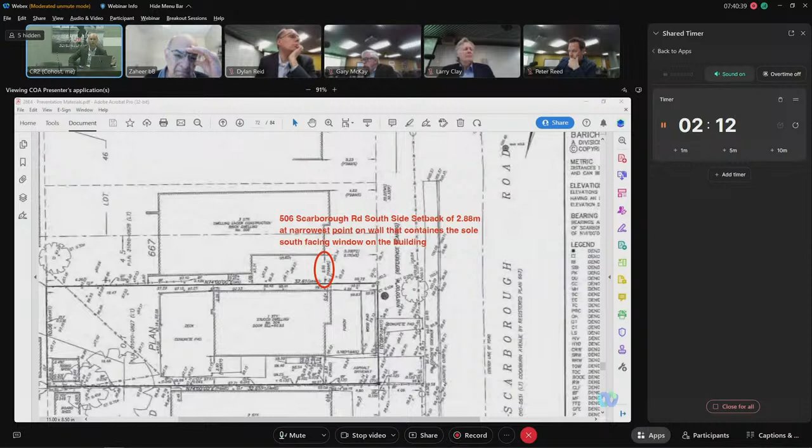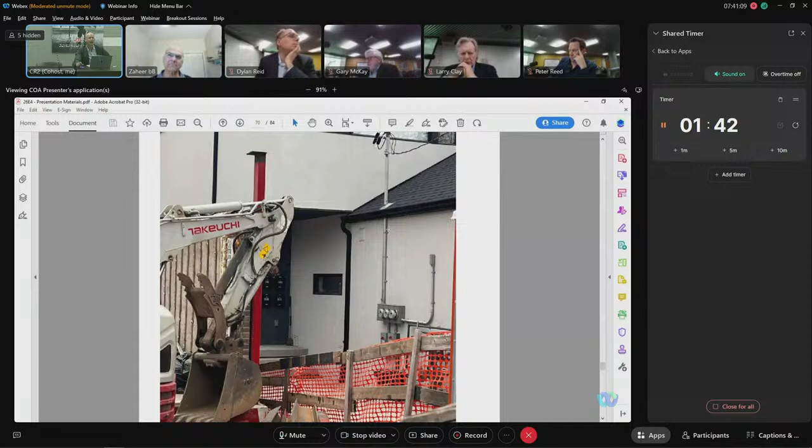As for the sunlight issue, if we go back to the photo on page 68 to 70, if we could zoom out a little bit. That window facing there, you can see it's below the second story section. If we go back a couple of pages, that window that the sunlight issue is raised about is below the cantilever. So the complaints about losing sunshine into that window - I'm not seeing how much light was ever getting into that window at a 0.66 meter setback that's not getting back at a 0.44 meter setback, when that window is below a cantilever on the second story. That's the width of that porch.

Also, in a city setting, in an urban setting, there is an expectation of certain sun and sunlight, but there's no expectation of not having any shadowing on a walkway between two buildings. So again, respectfully, I don't think that that's a valid concern in the context of an urban setting with two fourplexes beside each other.

In terms of some of the concerns raised by the other neighbor, I think some of these concerns raised by the first neighbor are not planning related issues, so I will not address them unless the panel would like to hear about them.

The neighbor from 502 mentioned the previous approval. The previous approval did not include any side yard setback variances. The side yard setback on 502, which I believe is the mother of the neighbor who spoke, is actually compliant on that side - there are no variances there. The setback is on the north side.

I did want to mention again about prior approvals. One of the prior variances was for a spiral stairwell at the front, a setback for a front stairwell, that has now been eliminated because the spiral stairwell has been put at the back and now complies with the setback. So only two of those prior variances are still going to be relied upon for the building permit.

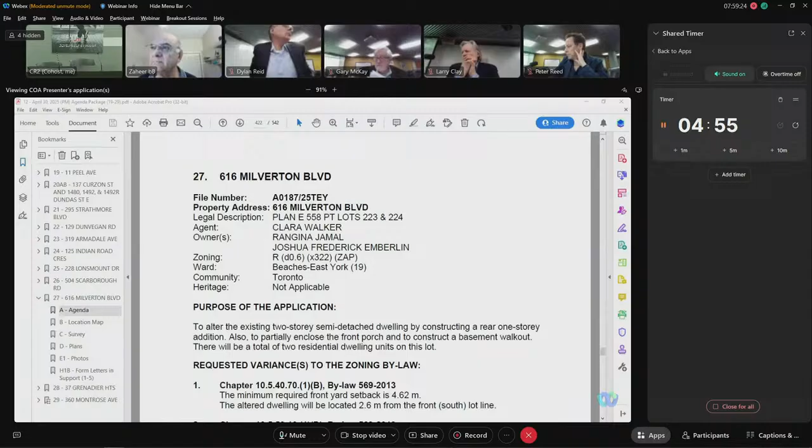You've got some revised variances, Sean. Could you take a moment and walk the panel through the public notice and the changes you're making? Absolutely, if you'd like a graphic, it's in my cover letter. But essentially, we have been able to add soft landscaping to the rear yard such that variance 3 is no longer required. And variance 2, the front yard soft landscaping, we've found some extra space to add a little bit of extra soft landscaping there as well, so we're able to reduce the amount of variance that we need there.

So the next page, that one there. You can see we've added a little strip of soft landscaping on the left side, and that brings our variance request up to 50.5%, which is 5.8 meters squared. Basically, we've squeezed out as much soft landscaping as we can extract out of the front yard, and added some to the backyard.

Okay. All right, other than that, it seems like a fairly straightforward application. Is there anything further you'd like to share with the panel?

Nope. The proposed front enclosed porch is common on the street, including the attached neighbors. Right, I agree, it's a straightforward application.

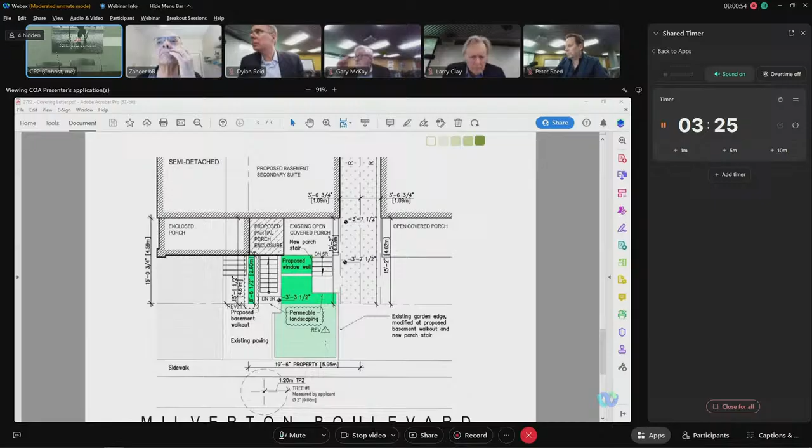Okay, any questions, panel? Dylan? I'm sorry, I just noticed somewhere, I think in the cover letter, you promised permeable pavers as well? Yeah, so there's a couple spots in the front where, on the site plan that's on the screen, go back, you see permeable landscaping. Basically, there's a couple spots where we will use it where possible. Okay, great, thank you, it's not lots, but it's something. Okay, that's in the plans, so, okay, great.

Yes, it is. And you've seen planning's comments about tying it to plans? Yep. Okay, all right, any further questions?

All right, let's go into committee. Who wants to take this one? I can take it, Chair.

Okay, thanks. I commend the agent for telling us about those changes. Those are positive. And the front yard, even though it remains a very small area and it's hard to fit in what they're trying to fit in, it's been improved, I think, to the extent that it can be. The variances are minor, and I move approval of the application subject to the community planning.

The amended application, amended, subject to the community planning condition. And do we need to put a condition for permeable pavers? No, it's in there, it's in the site plan. Okay, all right. Motion by Mr. Reed to approve, seconded by Gary. Did you want to second this one? There you go, Mr. McKay.

All in favor? Very good. You have your approval, thank you very much.

All right, the next item. Everyone okay to continue, or does anyone need a break? We got 2 more to go. Do you need a break? No, I can keep going. And Dylan's thinking about it. Depends on how long these go. All right, let's push on then. Okay, if you need a break, put your hand up.

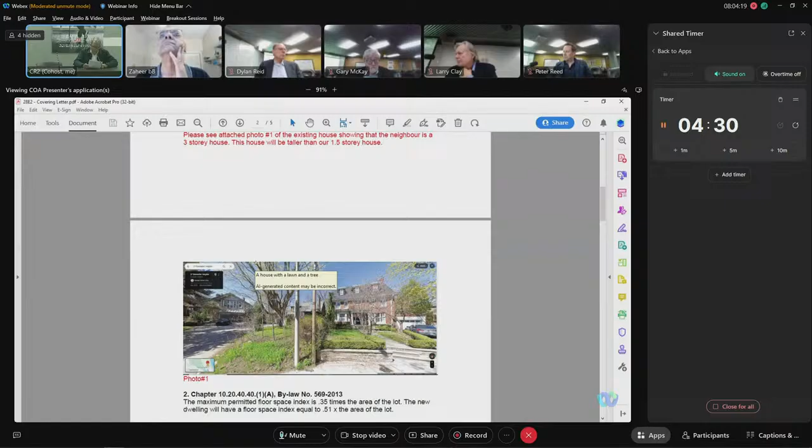With respect to the building height, my rationale for the increased building height was the design of the building makes the dwelling appear to be 1.5 stories with a main roof line that recedes away from the street with dormered windows on the second floor. This reduces the impact of the height at the street and, in our view, is compatible with other homes on the street. The gabled wall on the front elevation meets the bylaw for height, and only the receding sloping roof that recedes away from the street requires the variance.

I've attached a photo that was just briefly shown there of the house next door. We're actually replacing the existing 1.5-story house that you see beside the 3-story house that I pointed out in this photograph, that is certainly going to be higher than anything we're proposing.

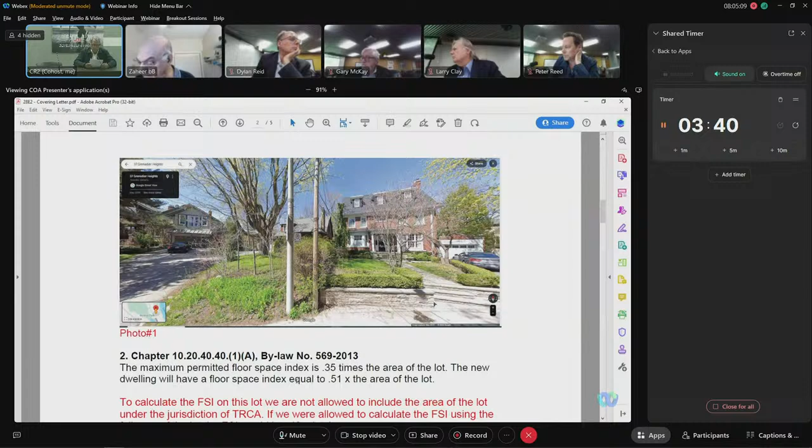And with respect to FSI, FSI is really about density. It's calculated at 0.51 times the area of the lot. I hadn't run across this before, but I find out that you cannot include the area of your property that's under TRCA jurisdiction. So if we were able to use the entire lot area, we'd be reduced down to asking for 0.48 times the lot area.

Then just a quick review of a search on your database for other properties in the area. I picked the ones closest to this house, 3 on the same block, that all have numbers greater than what we're requesting.

If we now go to a discussion on the rear yard setback, if we can go to that drawing, that's the useful one. It's a trapezoidal, triangular shaped lot, if you will.

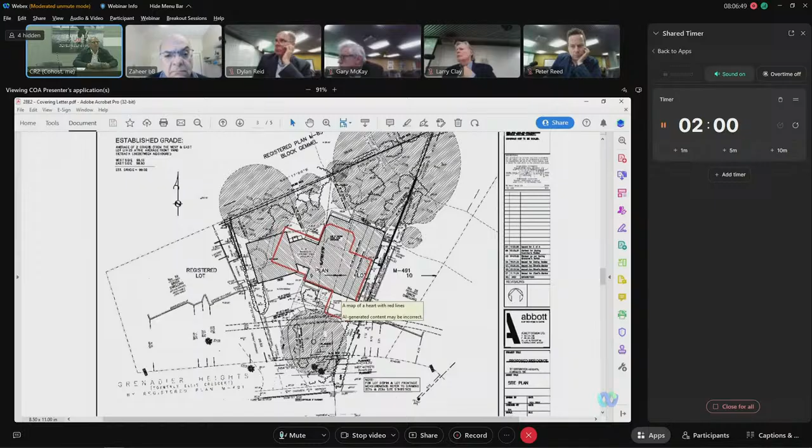As you can see, none of the homes to the west of us comply. They're existing non-conforming because of the shape of the lot. The red outline is the existing house, and you can see that we are no further encroaching into the rear yard setback than it's only that garage portion. We basically just cranked the garage to better address the street. We're actually improving slightly the rear yard setback, but the existing is non-conforming, as is the neighbor to the west, who actually has only a 3-meter rear yard setback, just by comparison.

Okay, and the side yard setback is number 4. It's required to be 1.5, and we are asking for a 1 foot, or 1.35 meter, side yard setback there. That was a result of us just wanting, again, to crank the garage so it addresses the street better than the existing house does. It was an awkward way to access the garage before; now this would be more straightforward.

And in order to get a side entrance into the house, we needed the width on the garage and couldn't afford the full 1.5 meter side yard. That side yard is adjacent to the neighbor's garage, so there's no privacy issues along there and no chance for any meaningful landscaping. So we don't feel that the extra foot is impactful at all. The house to the west, again, only has a 1.29 meter setback by comparison at its closest point.

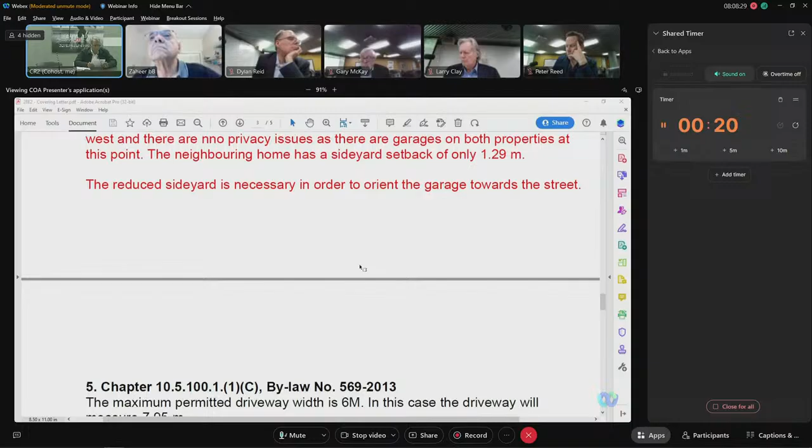Driveway width. Again, this site plan is useful for illustrating our issue here. We have a very large, mature private tree in the front yard that we're wanting to protect, and forestry wants us to protect it. So the driveway is designed so that you can back out of the... We're just backing out straight out of the garage and going around the TPZ of that tree.

And at the point where we wrap around the tree is the width of the yard that needs the width of the driveway that needs the variance. So that's driveway width. And TRCA, we have a permit from TRCA, so that takes care of number 6 and 7. That's my permit.

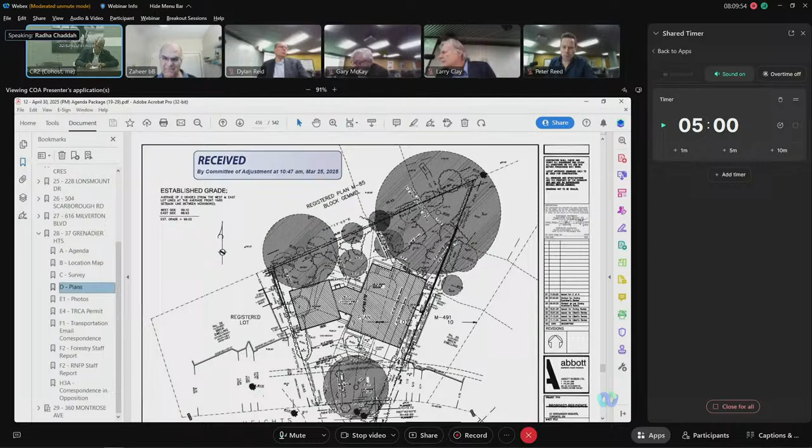Yes, my name is Radha Chaddah, and I live at 181 Ellis Avenue, and I'll be speaking for my household. So I want to say hello, greetings to you all, the hosts and the panelists. Our concern here is the request for the variance of the required setback from the north lot line. So on the agent's plans, I didn't actually see any response to that third item on the list of requested variances. This is my concern.

So there's a very large tree, a very old maple tree on my property, and the trunk is right up against our shared fence. The size of this tree is not represented to scale on the plan drawings. Its trunk is 15 feet 7 inches in circumference, and arborists have aged the tree between 200 and 300 years old, so it's at least 80 feet tall. The requested variance would place the new build 2.93 meters closer to the tree, and we're concerned that the new foundation will seriously injure the tree. So I'd like to ask about the process of evaluation regarding the injury of this tree. Has the permit to injure this tree been issued by Urban Forestry?

We will put that question to the agent. Okay, so as I said, I didn't see the agent's comments about this third item on the variance, so maybe he could address that. Anything else? That's it, really. I speak for the tree, and I'm hoping to look out for it because it's been here in this neighborhood longer than any of the houses have.

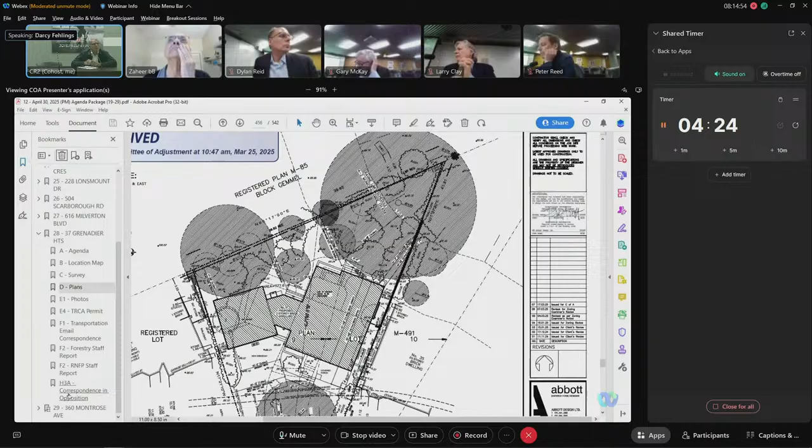We submitted a letter of objection, but we're also concerned about the variances around the increased allowed floor space and the rear yard setback. Practically, this pushes the new dwelling 3 meters further back from where it currently ends behind our house, which will negatively impact the light coming into our kitchen. We also have significant green plantings—a cedar hedge and a katsura tree—along that area that will not receive any light and will be impacted. Those are our concerns.

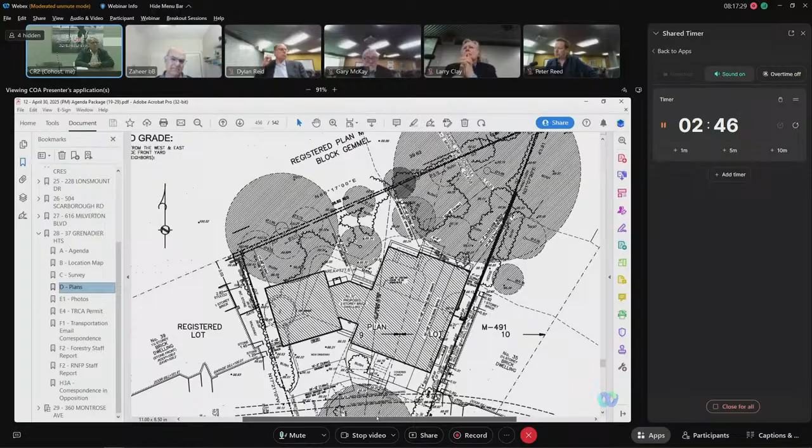And 39 was concerned about the proximity of your new build to their property. We're talking about a 1-foot variance there. I don't know about her views, but looking at the plan, it looks like their garage is next to our garage, so I don't know what the privacy issue is. That's it. All right, panel, do you have any questions of the agent?

Okay, it doesn't look like we have any questions. All right, let's take this into committee.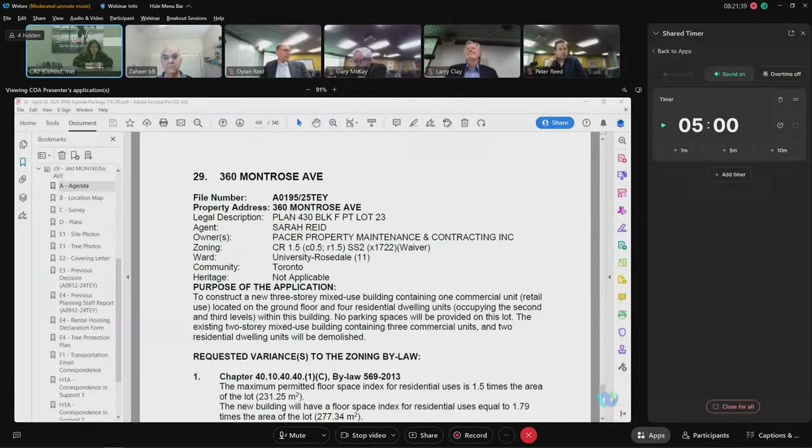Okay. Good afternoon. My name is Jennifer Cudlitz, agent for the owner. My address is 360 Dufferin.

All right, we have some folks who wish to speak to this item, so we'll need a presentation from you. Absolutely, I appreciate it's been a long afternoon, so I'll keep it as succinct as possible. I'm just going to start by saying 360 Montrose - we were here January 15th, so this is a revision to that.

Just for starters, no objections from transportation or planning. I have it's up on the screen. Great. So we've got a number of variances - there's 9 variances here. What I will say is it's quite a unique site. We're in a CR zone, but the scale of the site itself is much more akin to a neighborhood-scaled lot. Our lot size is 4.3 meters, about 14 feet, by 34 meters.

I'm going to go through each of these variances as we move through the presentation, but essentially we've got some FSI, some parking requirements - sorry, Jennifer, did we get this? Yes, we have this in our package. For the chair, the presentation - it was in the extra late folder. Oh, extra late, so we haven't seen it, haven't had access to it. Yeah, so I'm sorry, we're just trying to figure out whether we've looked at this or not. We haven't seen this. Okay, I appreciate that, I think it was sent in on Monday.

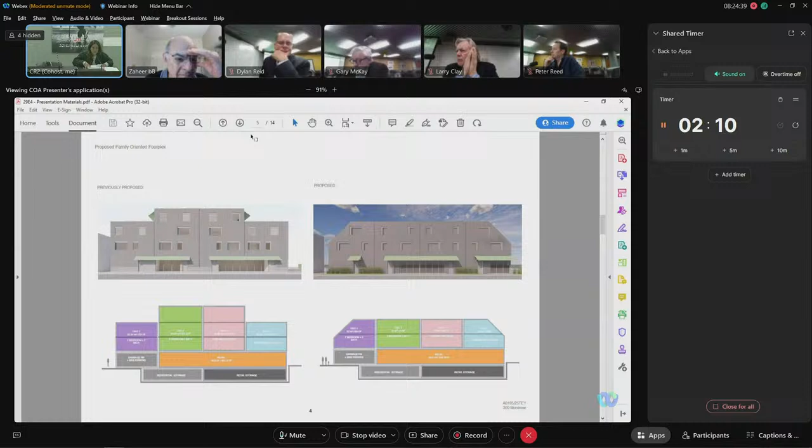This is essentially further down Harbord, showing some more density. I think Harbord can handle the density. That's just some more of the same—diagrams and plans showing Harbord handling the density all the way along.

I'm going to get to the variances now. So we do have an FSI variance. The maximum, we're asking for 1.79 from 1.5. We feel that this is minor in nature.

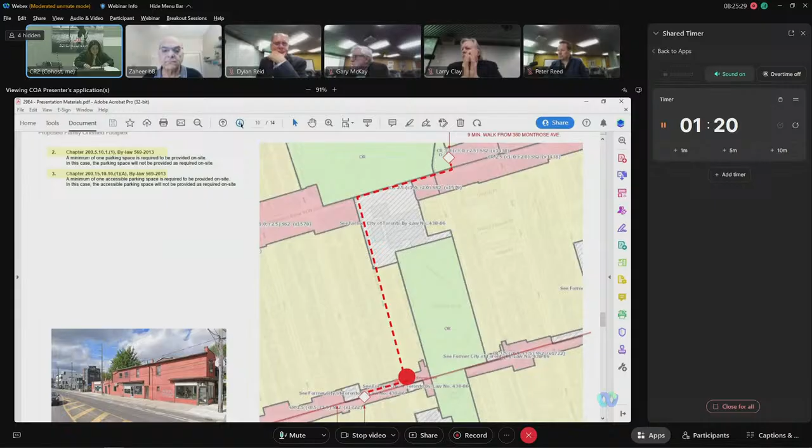The next two are for parking. Because we're in a CR zone and there is commercial at the base of this, we are getting a couple of parking variances. The whole site is built out, so we actually can't provide it, but the diagram here shows the walkability of the site and the adjacencies to transportation.

Variance 4 is for the height of the first floor. Again, in a CR zone, we have a 4.5 meter requirement for the height of the first floor, which is commercial. We're keeping that at a residential scale in order to maintain the scale of the street and also allow us to stay under the total height variance.

The following 4 variances are all setback related. We've got a requirement for a fence on the north side, where we'll be essentially at a zero lot line, so the fence will be the building itself, similar to the existing condition. A landscape buffer is required when you've got a CR zone adjacent to a residential zone—again, that's a nuance of this site, and we won't be able to provide that.

Number 7 is a 3 meter setback requirement if you don't have windows. We're proposing to just build on the same footprint—we're not going to have windows on that side, but it is producing a variance here. And finally, at the rear yard, we did work with planning to have lane widening back there.

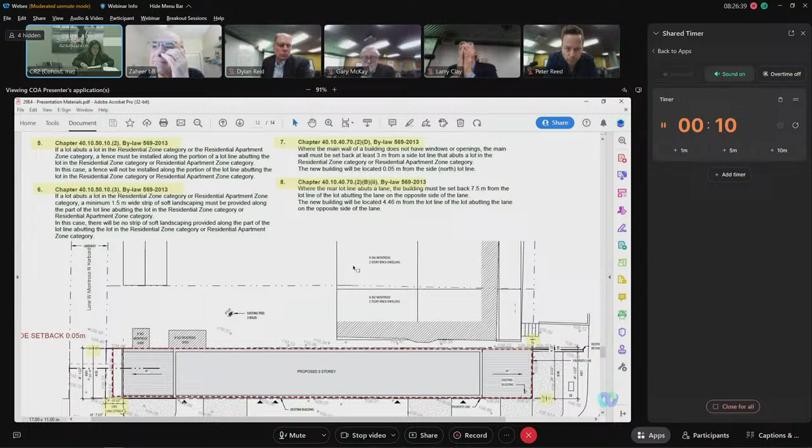That's what that is—oh, shoot. Actually, I ate up some of your time, so keep on going.

Thank you. This is the last of the variances, and again you'll see the lane widening back there. We are getting an angular plane variance because we're basically starting the angular plane from the setback at the lane widening that we worked on with planning. So that little blue triangle on the left-hand side is the only massing variance we're requesting. All of the red is as-of-right, and the yellow represents the as-of-right for the neighbors to the north.

That's kind of it, and I know we've got some speakers, so I'll address their concerns. Great, thank you. All right, why don't we go to our speakers?

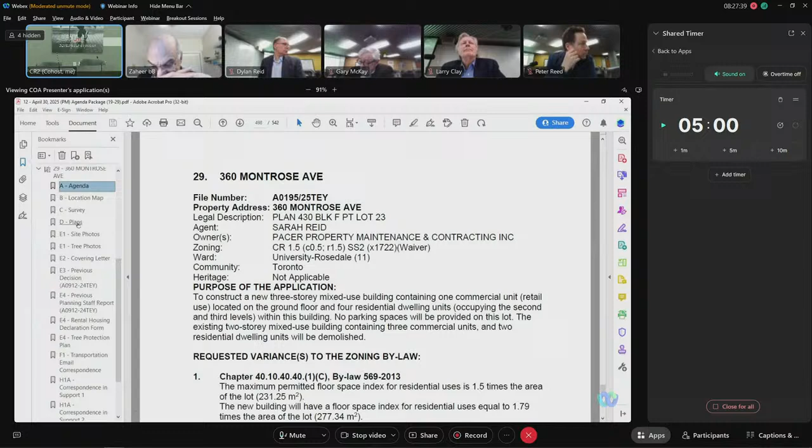Sure. Good afternoon. This is my microphone—is the red on? Just push the red button. Well, you can sit wherever you like. All right, I do also have, given that you're tired, my letter that I've written. I do have copies of it. Could I? No need for that? Okay, all right, thank you.

Committee of Adjustment, my name is Alex Stamp, and I am the homeowner at 362 Montrose, which is the property immediately to the north. My wife and I have lived in this house since October of 2002. Over the past 23 years we've welcomed 2 children, as well as multiple dogs, including the 2 we currently have. We are opposed to this application for a variety of reasons. We have lived next to this property for 23 years.

It has had a consistent tenant for the entirety of those 23 years, as well as commercial units that have been consistently occupied, with no more than a 3-month vacancy for some parts.

In the applications for this property, the phrase 'sun-facing family units' was used previously. I would like to point out that this building will literally block out the sun from our family. We have reviewed the shadow study document that we don't see as being provided to you, and find many inconsistencies.

In the study, the projected shade of the 3-story building is the same magnitude as the 1-story garages in the area. Even with this questionable projection, we will still be in complete shadow until roughly 3 p.m. each day. While you have not been provided with this shadow study, at noon today, for example, the 2nd story of the building next to us put shade across 70% of our property. 3 stories will completely cover us for the majority of the day.

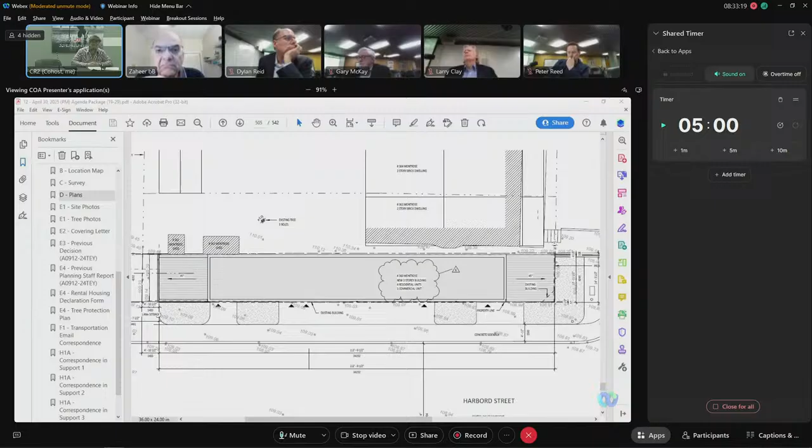In addition, my neighbors and I frequently have issues with people parking behind our house, and these 4 units plus commercial spaces will increase the need for parking. In conclusion, we see the impact of this as a negative to our community, not in line with the statement of creating beneficial housing, as it renovicts current occupants and depreciates value for long-term residents. This is a financial benefit to the owner at great cost to many, including severe reduction in property value, as well as risk to my family.

If the mandate of this committee is to ensure quality family housing, then I am asking for protection of my family house. This is literally a condo developer wishing to cast a complete shadow over my family home. The previous decision of this committee was good building, wrong location. Whether it is 4 floors or 3, the negative living conditions for my family at this location will remain unchanged.

Thank you very much.

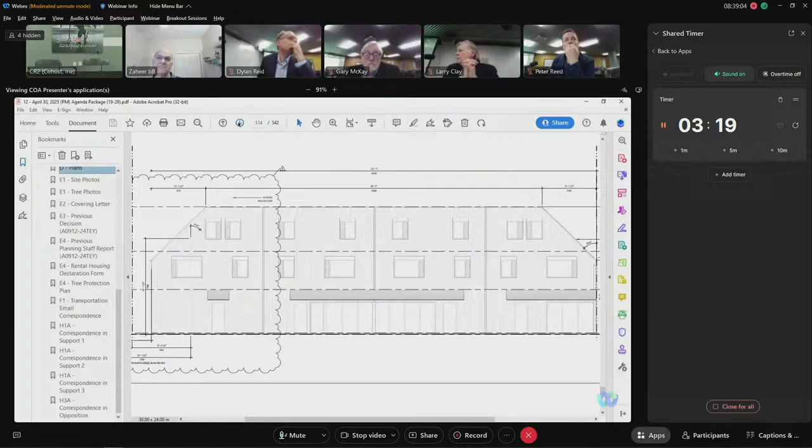Last time I made the point that, since avoiding a zero setback is very difficult on this site, an acceptance of the zero setback should be conditioned on the height being reduced. For example, if you have a 3-meter setback, instead of a height of 10 meters, it'd be more reasonable to have only 7 meters high. That means the east side of the building would be 3 stories high, but the west side would only be 2 stories high, so there'd be only 3 units there. I think that would be a much more acceptable compromise to people living right to the north of this property.

Looking at the materials submitted for this application, I was a bit surprised to see 5 letters of support. Looking closer, it turns out they come from 4 different addresses, all south of Harbord Street, so none of these people would be directly impacted by this development. Only one address is within 250 meters of the proposed development. I also found it strange that at least 3 of the letters came from architects. Maybe most people living south of Harbord are architects, but I'm wondering how all these architects submitted letters of support. Bottom line is, I'm not convinced these letters of support really reflect how the people living close to that intersection feel about this development.

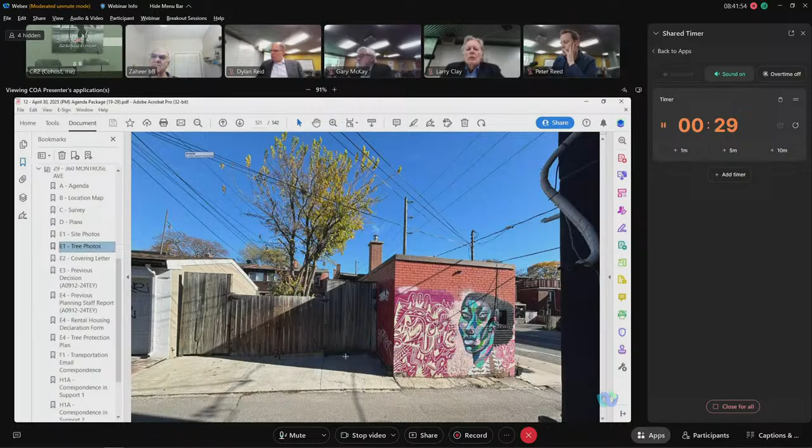One thing I'd like to bring up also is the tree. We brought that up last time. I'd appreciate if forestry could confirm whether the tree on the neighbor's property is indeed protected or not. The picture we're seeing here is kind of misleading because you don't see what's happening in the bottom half, the bottom 2 meters of that tree. The trunk, as I measured it, is above what it should be to be a protected tree.

In conclusion, I would ask the committee to really focus on one key issue here, which is to balance the number of units being added to 360 Montrose with the side effects to those properties directly to the north of it, meaning 362 and 364 Montrose. Thank you for your attention.

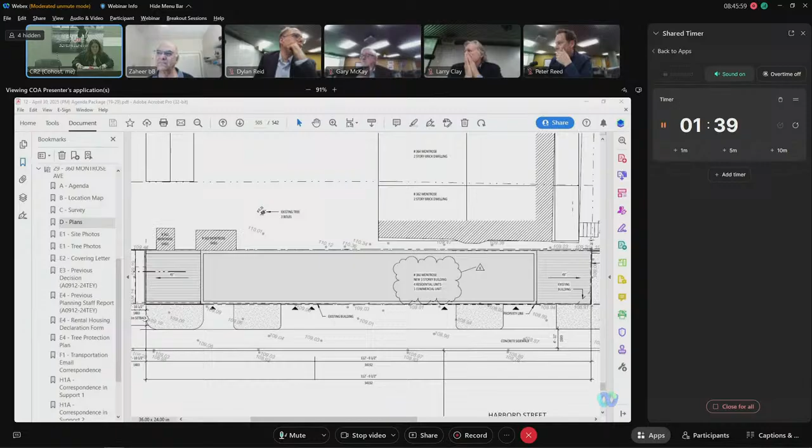So that was our attempt, and we do believe that this site could service 4 rental units, and hopefully those people in the future can be part of a very tight-knit community.

Finally, Mark, who is the fitness instructor on the ground floor of this current building, we've spoken to him. He's interested in taking the rental unit in the future. I can't verify that, but I just want to say that community is important to this team and to the owners of this site as well. They're not trying to be big box developers or anything like that. So I'll leave it there.

Thank you. Panel, any questions?

Dylan? I appreciate you're not asking for a height variance, that's great, certainly helpful. One impact that does affect the northern neighbor in terms of light and other things is that in variance number 8, you're not giving as much of a setback from the lane as is required, and if you were following that, it would shorten the building and open more space. I was wondering if you could talk about that, but I also understand that you are giving some space to the city for lane widening. Could you elaborate on the whole lane widening thing in variance number 8?

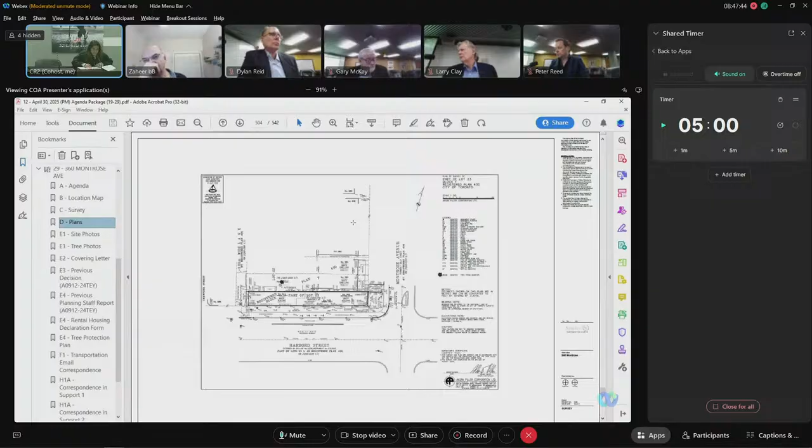Sure. We did work with planning on the lane widening. The idea was that the existing build out right now, you can see it in the rear photo, that one-story brick building goes really to the very end point, and it is quite a tight condition.

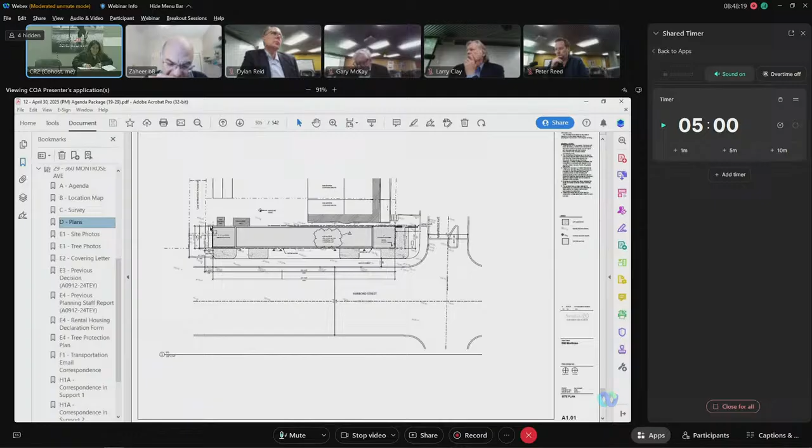Planning was in support of this proposal, but asked us to lane widen, and the reason that we're building it out is to be able to support the 4 units. It's quite a narrow site, so in doing so, it is a challenge to get 4 units in there that aren't just one bedroom. We want to be able to encourage families, or a single parent and a kid, so we're trying to have more than 1 bedroom units.

The adjustment from the previous proposal to this one with the angular plane does already significantly impact that 4th unit, and I think advocating for good rental units in great, tight-knit communities is something that we are very passionate about. And so, using the EHON principles, we developed this plan.

How wide is the lane now? Is it going to be wider with the extra space that you give? I think...

The new building will be 4.46 meters from the lot line abutting the opposite side of the lane.

Okay, thank you. Anyone else? No further questions? All right, let's go into committee. Some of us were involved in this application when it was previously before us.